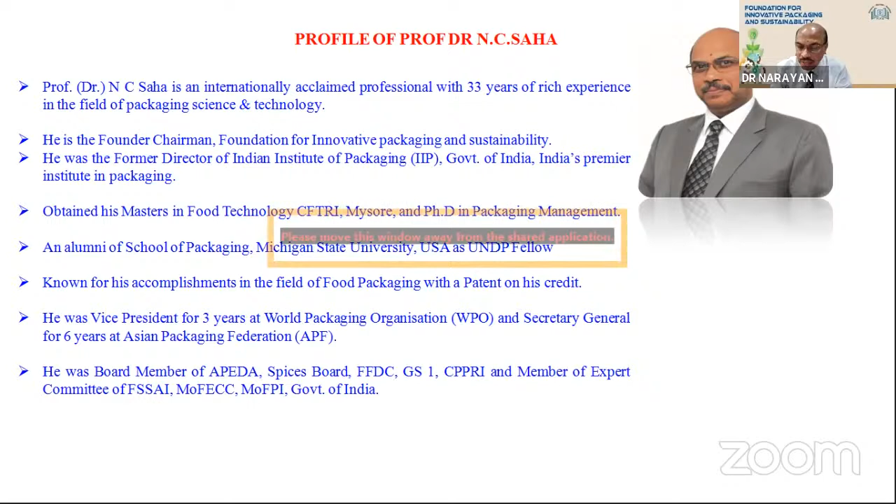The topic or theme of that conference was how best we can make recycling a profitable business. Having had a grand success with part one, we have taken an initiative to do part two, where we are thinking about MLP, the multi-layer packaging, which is a very hot subject of concern today, with everyone focused on multi-layer packaging, how best it can be recycled and how best it can be managed.

Today, all of us know that plastic is a wonderful material, and there is no alternative to plastics material. In fact, if you look at the consumption of packaging material, more than 50% of packaging material is plastics, followed by about 35% paper, and then glass, metal, and so on.

Among all the plastics, the major growth is the rigid plastic material, including PET bottles for packaged drinking water and beverages, plastic caps and closures, with an annual growth of around 25 to 30%, whereas flexible plastic has got only an annual growth of 11 to 13%.

But very interestingly, the flexible plastics material, which makes the multi-layer material widely used by FMCG companies, including fresh milk, is mostly visible because of its 5 to 7 color or excellent printing. And this has become a great concern to society in India as well as overseas. But this is mainly due to a lack of proper collection mechanisms implemented in the country, which leads to the problem of littering and environmental problems.

Due to this fact, the government of India has also made a restriction on single-use plastic. But the question really lies here: who is the culprit and who should be victimized? Is plastic the cause of environmental pollution, or rather are we, the citizens, responsible for creating this problem? There's a great need to educate citizens to change their behavior so that post-consumer plastic waste material is collected properly, recycled, and converted into value-added products and not allowed to be littered.

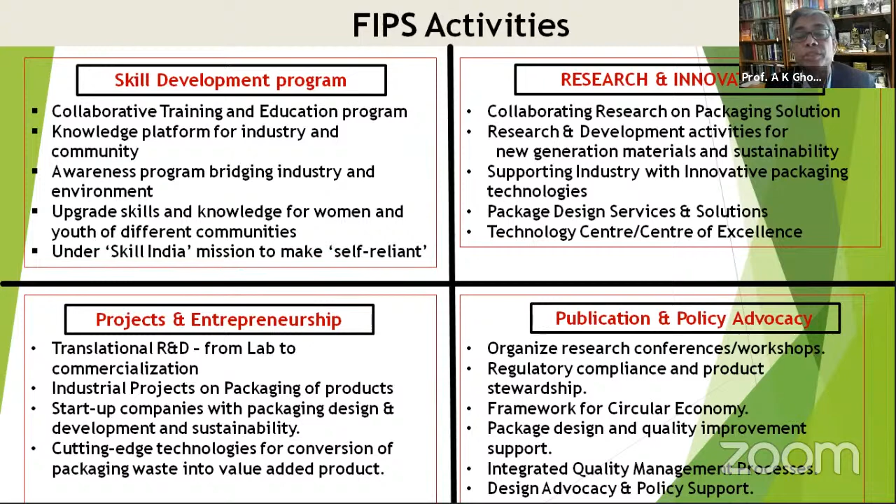Next slide, please. And we put together a KITE module for the foundation, K for the knowledge platform, I for information technology, and T and E for the training and education program. As you can see, based on this information package and knowledge platform, we have already considered many programs like basic training program, elementary training program, advanced training program, entrepreneurship training program, and we have taken up quite a few of them already. We have collaboration with a number of institutions.

We have collaboration with the Northeast Center for Technology Application and Reach. We have collaboration with Mahatma Gandhi University, as Professor Sabu Thomas, Vice Chancellor, is already present here and has already mentioned, and we are very honored by that. We have a program with NERIST in Arunachal Pradesh. We also have an MOU with the National Institute of Micro, Small and Medium Enterprise, MSME. We have an MOU with the Foundation of Innovation and Technology Transfer at IIT Delhi in a similar area of work. And we also have an MOU with the University of Science and Technology, Meghalaya.

And recently we have an MOU with university colleges within Delhi, which is Bhaskaracharya College of Applied Sciences in Delhi University. And we have also extended MOUs to 2 other associations, including the PhD Chamber of Commerce in Delhi. Next slide, please. As you can see, some of our activities undertaken from February this year on food packaging, and also packaging innovation and environment, carried out with the PhD Chamber of Commerce. Next slide.

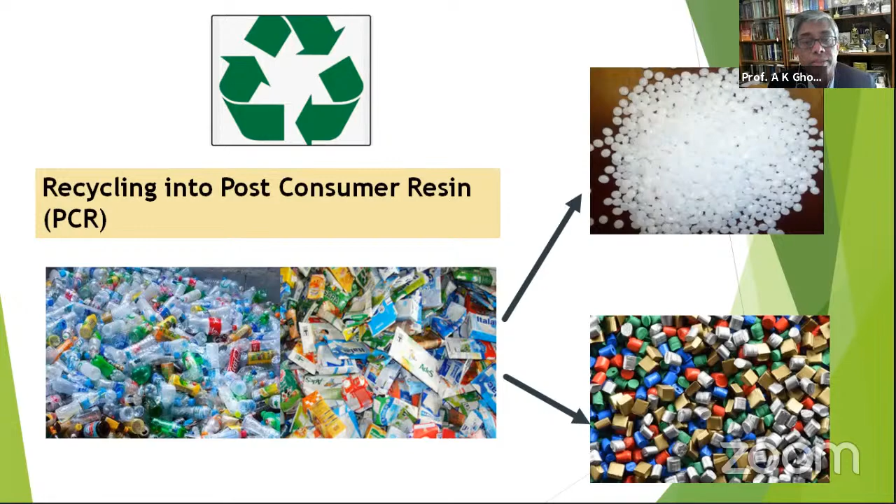Next slide, please. And as a part of our activities in the foundation, we are involved in studying the product life cycle, which involves selection of materials, optimization of the production technique, and an efficient distribution system, which involves reduction in environmental impact that can be calculated from the life cycle analysis procedure: low energy consumption, clean energy source, consumables reductions during use, and optimization of the initial life cycle and of the end-of-life system, and we take care of all these, including the recycling of materials.

And the foundation looks into deriving circular economy thinking in this way. We have taken a couple of programs where we look into material efficiency and carbon footprint mitigation together, how they can help each other. We can see how we can take materials like multi-layer packaging, make post-consumer recyclate from there, and use it as a replacement of virgin material, whether from single family or multi-family material, assessed by life cycle assessment with the world standard of ISO 14040 or 14044. This is available with the foundation as a very valuable activity.

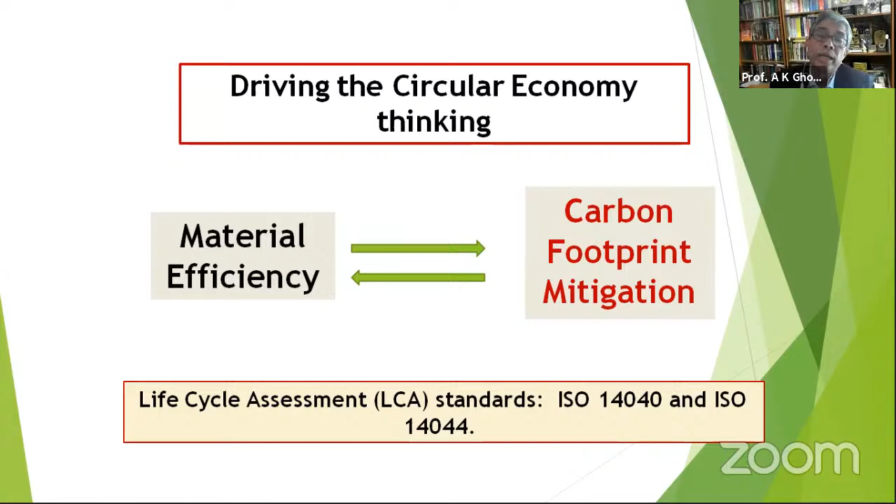Next slide. And to summarize, the FIPS activities on sustainability provide lots of opportunity for circular economy solutions to expand the scope of recycling methods across the plastic value chain. Plastic waste leakage into the environment is less desirable, and we can see what are the preferable methods to take care of that.

These are taken up and can be carried out as a part of the activities of the foundation, which involve establishing a recyclability hierarchy. We can compare upcycling possibilities versus downcycling. We can see the effect on recyclability due to the presence of similar and non-similar materials. Material reduction, especially in terms of thickness, versus collection and recyclability from waste. In one or two projects we are looking into that, and we'd like to look further into this.

Material selection, where we can lower the number of layers versus bringing higher functionality through compatibilization or some material addition. And there can be design for sustainability, and the other area is alternative material synthesis, synthetic versus biodegradable or bio-based material. So these are the activities we'd like to emphasize and strengthen.

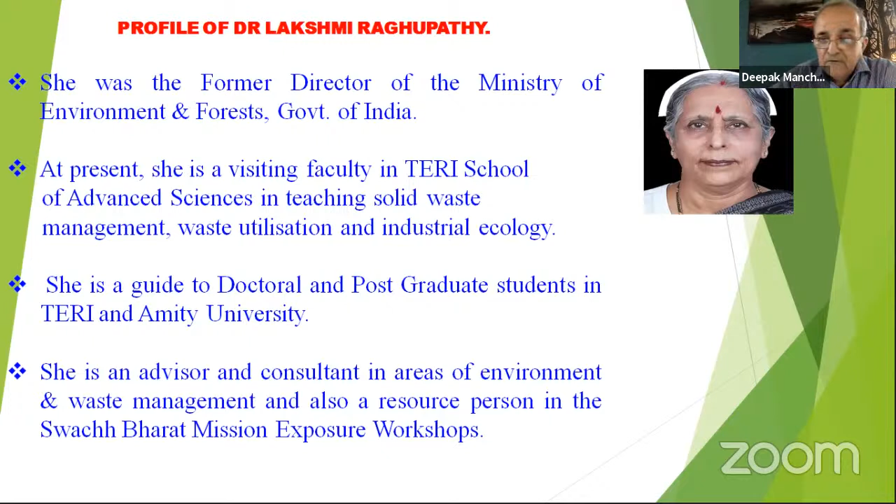You are muted. Please unmute yourself. Yeah. Priya, can you... Yeah, I've done it.

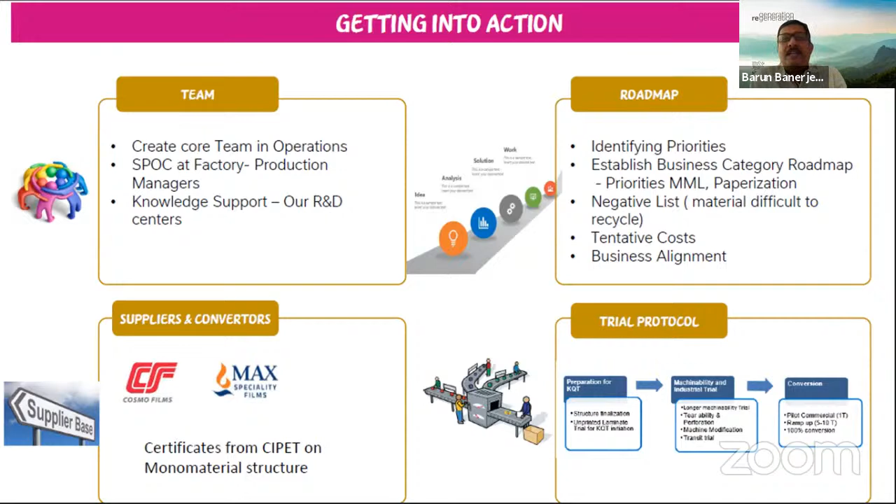So this is a way, and then we took the trial protocol with the key success criteria on how we should ramp up these trials. It should not be like we took smaller quantities; we looked at it in different machines, different configs. We have different types of machine, different speeds of machine, different performance of machines. And I'll go to the next slide where we have looked at the machine improvements we had added in our development also.

So here we also had to learn, unlearn, then relearn, sharing the learning with the learning log with other factories together. It is not an easy journey. It's a complex structure. So we need to see all the process parameters with our partners, upstream raw material, as well as with our converters together. We also need to look at all the success criteria which are mentioned, like seal integrity, which is the first thing, so that our pack doesn't open up.

Warehouse cross checks are very important, because when you produce in multiple numbers, you have to do a lot of checks to see that your packs are defect free. Because with monomaterial, you will also see that it has a lesser seal strength, to the level which is optimum, but when it is really going through the transport stress, is it able to withstand? So seal integrity is good, but is it able to handle all the transport tests? So this is the area where we thoroughly underwent the tests.

And second, another area where we saw the defect level in the sigma level: how are your packs in the sigma level, the defects between the current and the new structures. Similarly, although it is a monomaterial, BOPP, CPP, this material storage is very important. Storage time, conversion time, all this needs to be maintained. We also looked at all the machine stoppages, analyzed them, then we did the transport test to see it.

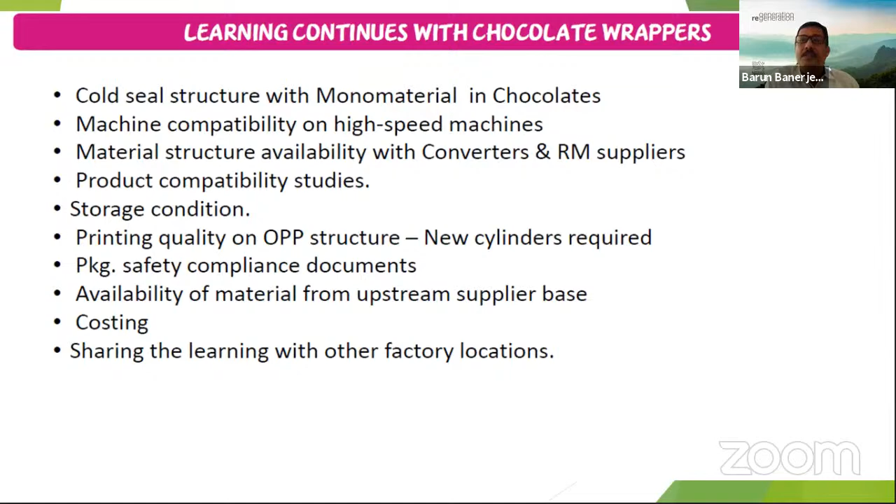Just a glimpse of them. We have also looked at the ones which litter, the BOPP tapes. Although the shipper is paper, the tape is loose and it is thrown. So how do you really handle that particular material - we used to use paper stick tapes, then we went out of the paper tape. So this is one example where we restarted looking at bringing back the paper tapes, which is a very simple one. That can work because the papers are being recycled, so with the tape in it, it always becomes difficult and becomes litter. So as a waste management solution, I think this is a very good one to work on.

Next, please. I will not go into detail, but this is a simple EPR, which is the compliance where we are plastic neutral from 2020 onwards. And I'm proud to say that we have managed plastic very well, which we produce as a post-consumer. We are doing complete recovery as per the plastic waste management rule regulation. We did engage multiple stakeholders to really see different areas where we can recycle. And we are also working now on pyrolysis, which could be another area where if it works, it would be the right approach to the circular plastic economy, to go back to virgin plastics. Now with the new regulation coming, I think with the use of recycled plastic, it's very good news for all of us.

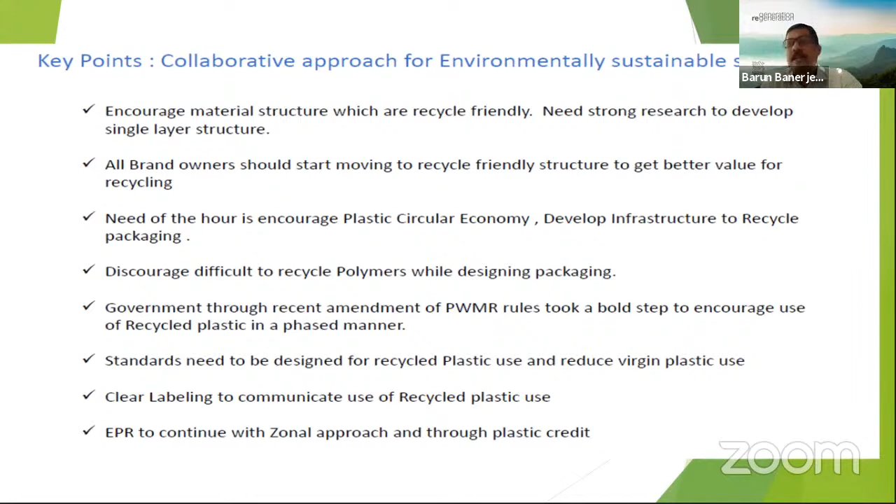Although we did our circular economy, we are doing our plastic neutral positive 100%. We are doing work on the hill station also, but this is the approach. Zonal approach would help definitely. With that, I thank Professor Saha, thanks everyone that you have given me the opportunity to share the MLP challenges to convert from MLP. Thank you so much.

Thank you, Barun. I think it was an excellent presentation, and I should say it's a true technical and scientific presentation. Everyone, the audience would know that packaging is not just wrapping the product. It's a combination of science, art, technology, and of course, economics. Barun was trying to emphasize what is the journey that Nestle is doing from the MLP to mono-material. Very frankly speaking, the multi-layer packaging, it is really by compulsion. None of the brand owners are interested to use more and more packaging material. Rather, they are considering sustainable approach, the resource efficiency.

But the problem is it has come by compulsion based on the food product. Some products are very oxygen sensitive, moisture sensitive. You need to have barrier properties. Single layer may not have an oxygen barrier, moisture barrier, sealability, printing, transparency. If you really want to satisfy the consumer, you need to have all these aspects. So what Barun was trying to say, his journey from Nestle, that from multi-layer to single layer, they are going, they have a lot of challenges they are facing, starting from the seal integrity.

At the same time, they have to also say that transportation hazards, how really it would function. But very interestingly, he said a very simple solution, they start with a tape, which is a closing tape. We say that as an ancillary material, I think Nestle has already switched over from the plastic tape to the paper tape, which was there about 30 years back. He has come back, and that's the small way they're trying to have a sustainable approach.

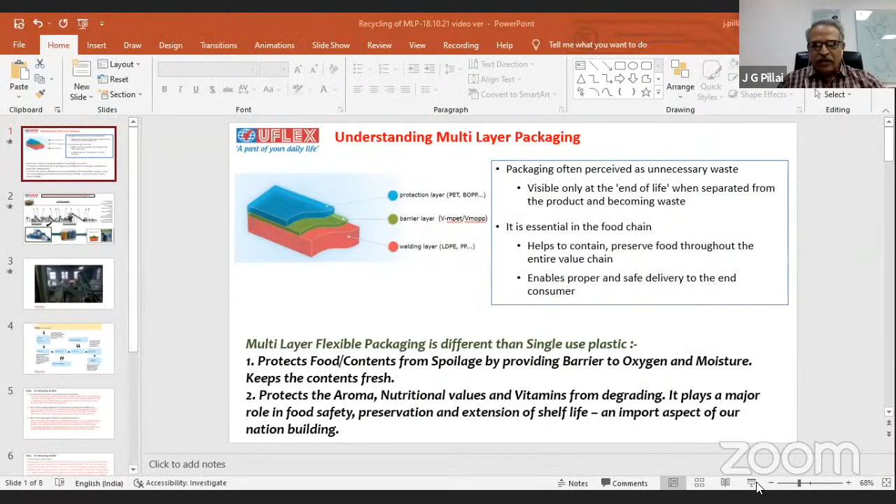Okay, has the presentation come up? Yeah, it has come out.

Most of you all know what multi-layer packaging is, and as Dr. Saha had explained, at this stage it is not very possible to completely change over to mono polymer materials because there are multiple layers in an MLP, multi-layer packaging, which provides functionality. And in a true sense, if you have to be sustainable in packaging, we have to address multi-layer packaging.

Because whatever we have done in the last 3 years or so, after Prime Minister Modi had made a speech from the Red Fort, we have addressed only single-use plastics. Single-use plastic, although it is an eyesore and you find it everywhere, in terms of the percentage of littering it is far, far less. The consumption of single-use plastic would be around 15 to 20% of total packaging consumption.

So we have been talking to the MOEF saying, let us address MLP. If you're really interested to address the plastic packaging waste issue, then you have to address MLP, and addressing MLP is obviously not easy. If it was easy, probably other countries would have adopted it significantly faster than what we are trying to attempt. But at least in this EPR, an attempt has been made.

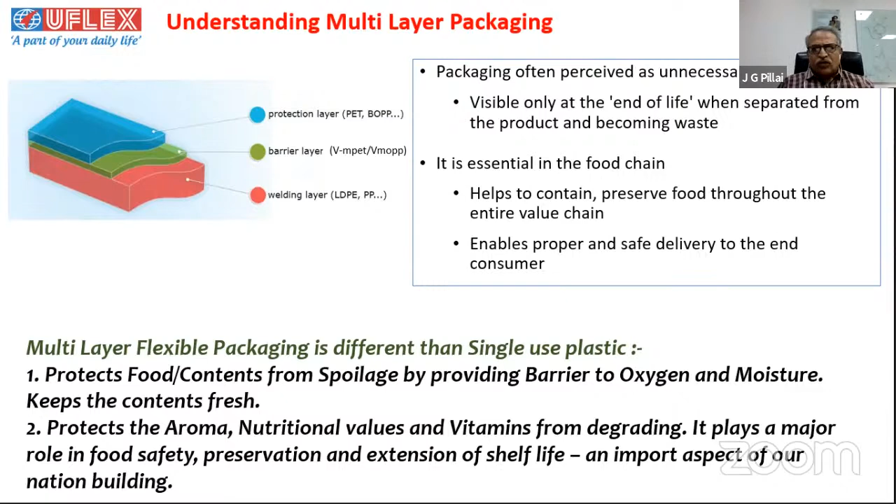So this is actually the point: although EPR talks about recycling in this edition of EPR, collection will be a major problem for every brand owner. Unless we have a collection system, MLP recycling would be a tough task, because it will not be available. Having said that, I'm here to discuss how we can recycle multi-layer packaging. I thought I'd just make this passing remark if we have to address sustainability in our country. Let us talk about multi-layer packaging recycling.

Indian multi-layer packaging is very different from the ones available elsewhere. The PCR MLP we have in India is very, very different because we use a lot of oil. And also, since source segregation is missing, we mix the multi-layer packaging waste along with the food. Now, as a result, the food has to be separated from MLP. So this is why what you are seeing on the screen is a very complicated washing system.

Normally an MLP line, I've seen one in Poland, is not so complicated. Here you will see at least 5 different types of washing. There is a friction wash, a rotary wash, a reverse screw wash, a hot wash, and a caustic wash. So this is designed for the Indian food, the Indian MLP, I would say. MLP is MLP everywhere, but when it comes to PCR, the Indian PCR MLP is widely different from the ones available. It is slightly closer to China.

China also uses a lot of soya oil, but they have a good source segregation system, so the plastic packaging is available in a manner where organics or food is not involved. In this case, we had to develop a shredding machine where we had to remove the food first. If I buy 5 tons of PCR, I get at least 2 to 3% of food in that, in terms of oil, salt, spices, leftover chips, leftover food. So you need to wash them thoroughly. This is a washing line which we developed in-house to wash the PCR.

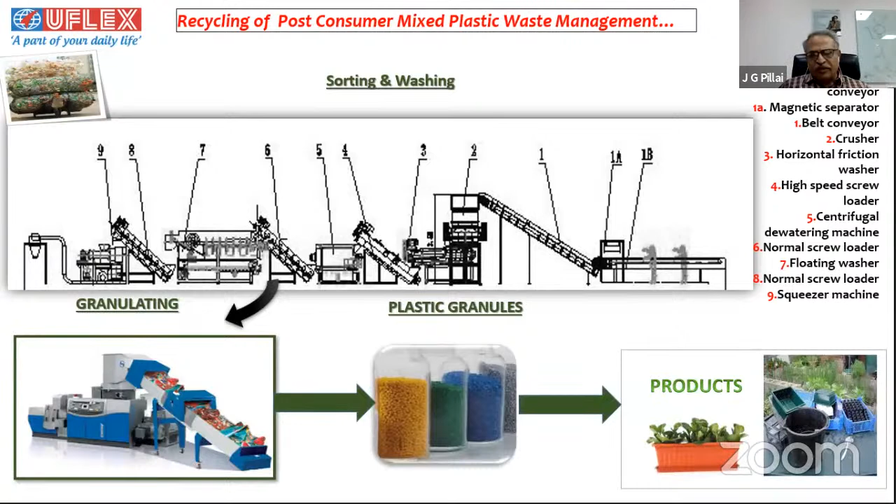This was a very important innovation, because the squeezed-out material has less than 2% moisture. This enabled recycling of multi-layer packaging without much issues, because moisture is a big deterrent for any recycling technology. Once it is done, it was very easy. We could recycle and make thousands of components from the MLP. We will see a small video. This is a live video from the Noida operations.

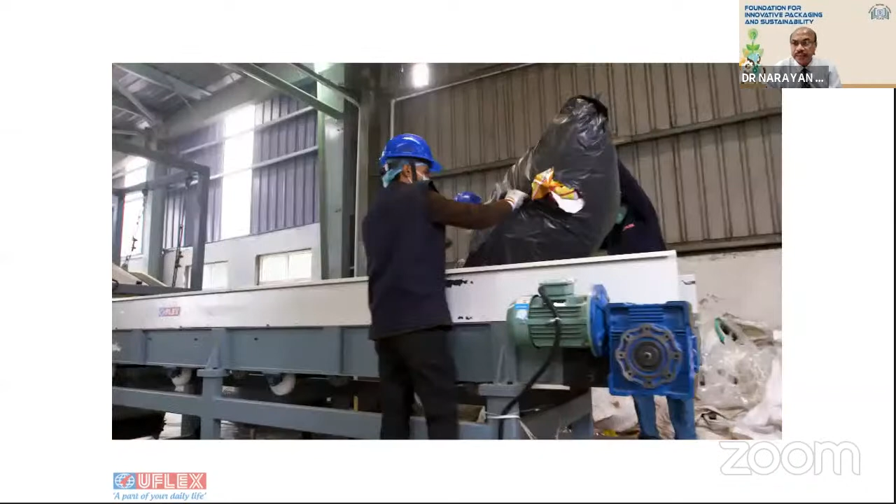I hope you can see the video. Hope everyone can see the video. Yeah, it's working. Is there any sound, Pillai? There is just music, which can be ignored. Okay.

So look at the waste, the quality of waste. The rag pickers pick it up from the nalas and the roadsides. From this condition, you have to bring it to a recyclable condition. So you see, first it has to be shredded.

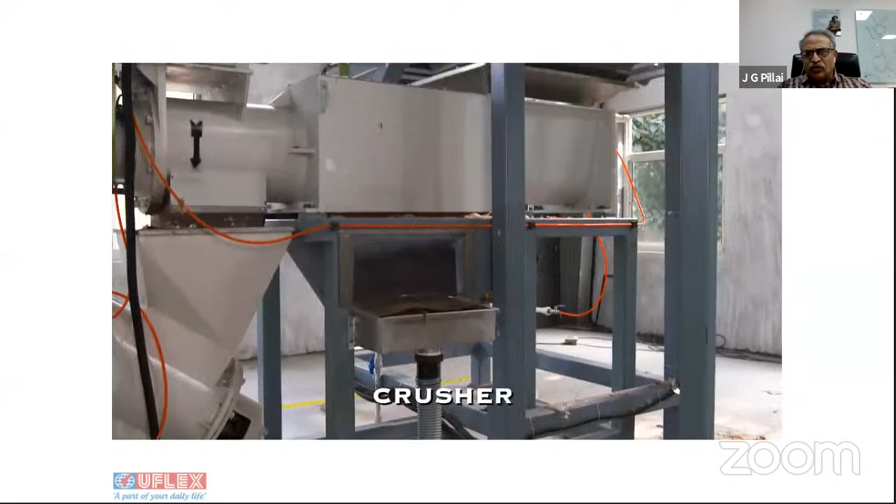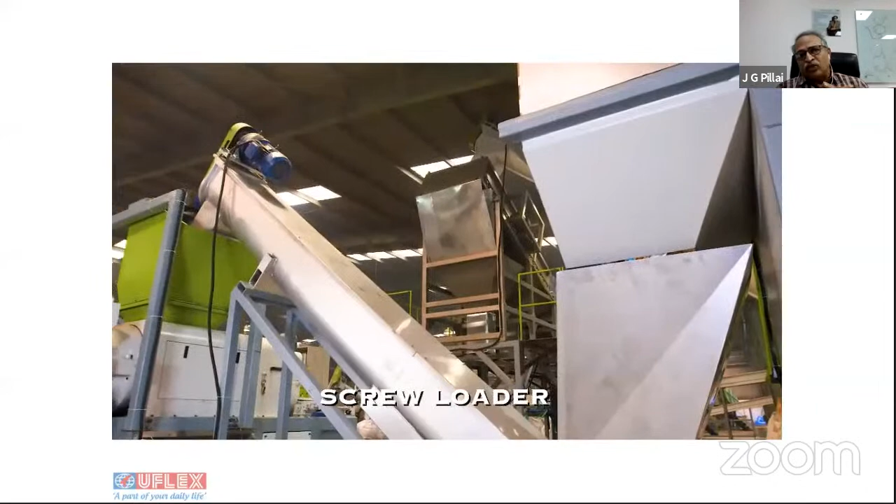So it goes through a multiple washing cycle. So this is the cleanest material which we can get after the washing. There is a last wash which is called a caustic wash, where it removes all the oil. And finally, it is loaded in a reverse manner. So the water flows in one direction, the material moves in the other direction.

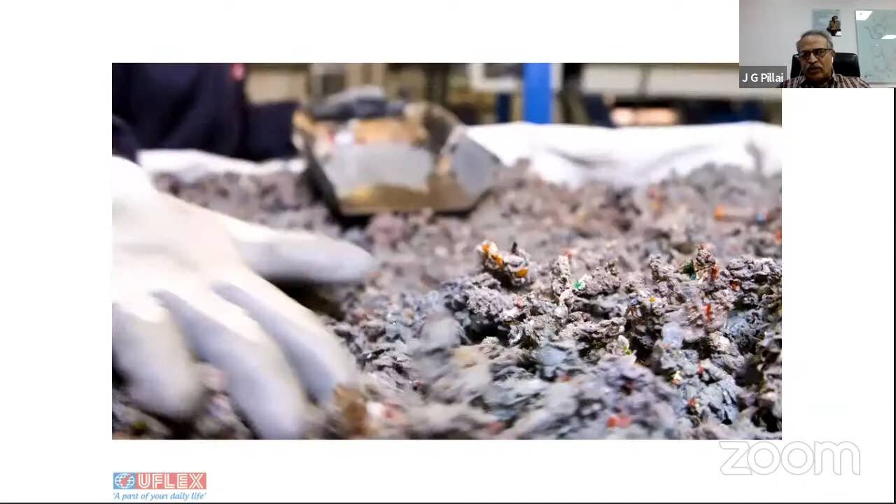So this is the squeezy which I was talking about. This is the squeezy material. So this is the catch. So the material is now a conglomerate, a composite of different types of material, inks, adhesives, metallization. Everything is squeezed out and mixed properly. So instead of feeding the MLP directly to the extrusion, this is being done.

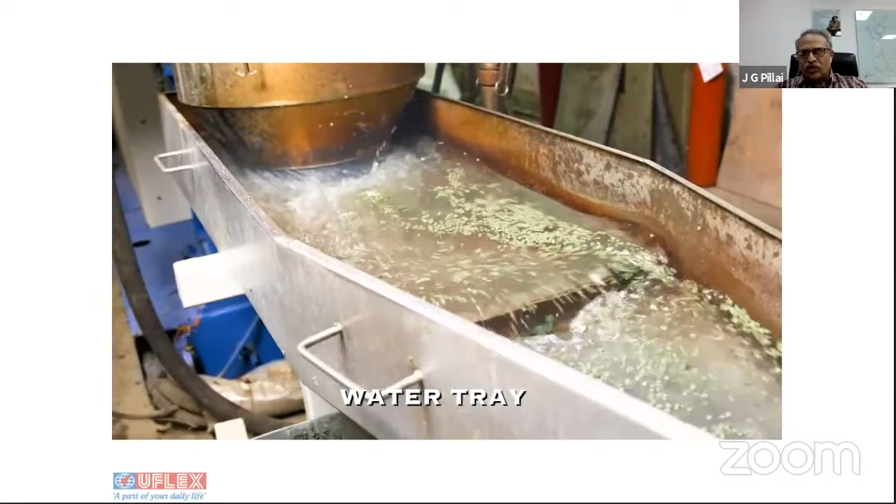And the extruder is divided into 2 halves. So first is a mother extruder, where we use a very large screen size. So it's a mother-daughter extrusion, where we have 2 different types of extrusion L/D ratios, so that you get a very fine mix of material. And you see the quality of granules. When you saw the quality of the input and now you see the quality of the granules, very, very different.

Now you can see thousands of components which we have made, mixing up to 50% of the material. This is the chair which is made from 50% virgin material and 50% recycled. So this is the technology which I was talking about. This is in the public domain, there is no proprietary information, and we are very open to providing this technology to anyone who wants it.

So there are compatibilizers available. Earlier it used to be only from DuPont, but now there are many companies. There's a company in China called Lushan. They also make very good compatibilizers. You send it to the mother extruder. The mother extruder has a larger screen size, so you remove the volatiles which are caused by the inks and adhesives. So all the volatiles are removed.

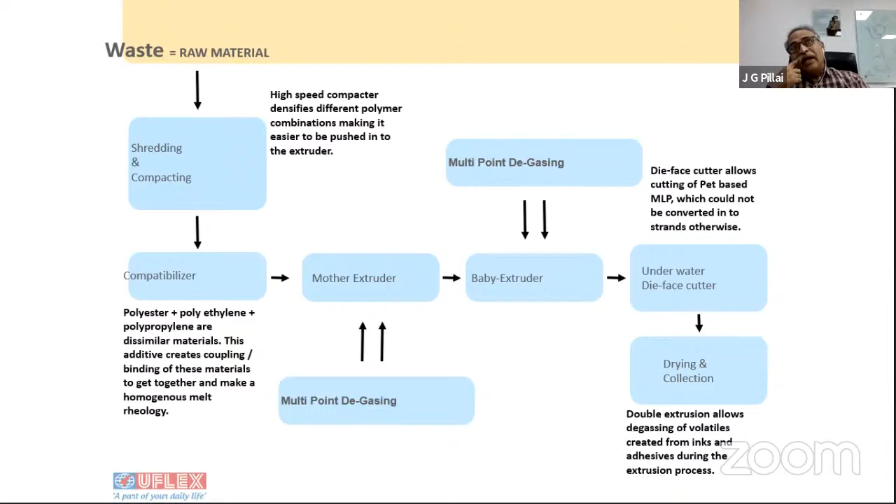So this is the technology which can be provided to anybody who wants it, because I was making a calculation. If the latest EPR has to be implemented, and if MLP has to be recycled, India would need over 500 recycling systems in 2022-23 alone. And right now we have less than 50. So you can imagine, we need to take these EPR guidelines very seriously and start investing.

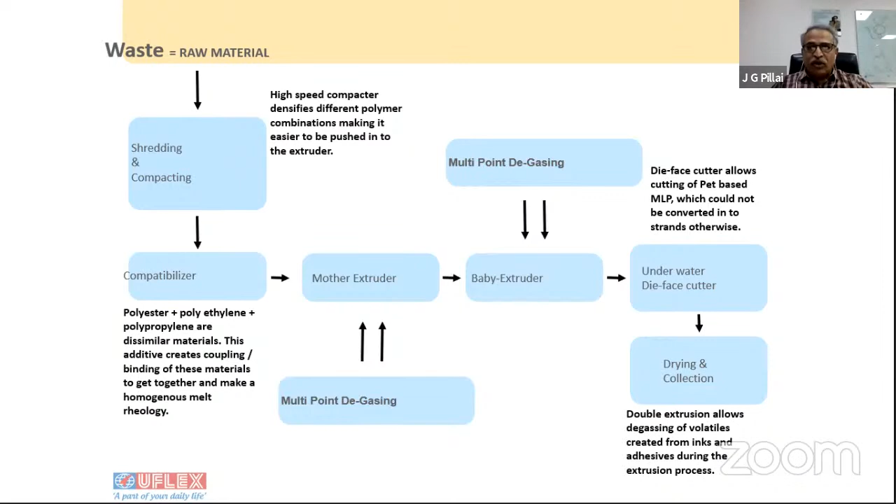We need more and more recyclers coming forward, more and more brand owners coming forward to promote MLP recycling, so that when EPR is in place, you don't have to cross-subsidize the EPR collection and recycling. So this is very important. We must start focusing right from today.

A little bit of FAQ. Is it really essential to have only a monofamily material? No, not at all. You can have multiple materials. The only difference is, if it is a mono material, you can upcycle it. We have made PE films with up to 20% PCR. We can go up to 30% PCR, but 20% PCR has very little drop in the mechanical properties.

Recently, we trialed some diaper bags, and of course a lot of carry bags can be easily made. Stretch film, somebody talked about stretch film. Stretch film with 20% PCR is easily made. So things like that. So monofamily material will only enable upcycling.

Other than that, if it is a multi-layer packaging with multiple polymers, then you'll have to go with the molding applications, downcycling. What are the envisaged applications? You can have a lot of applications in molding. In UFlex, we have 14 film lines, and all the film lines use cores, you know, the core plugs. All these core plugs are made from recycled material. So we have a consumption of around 3,500 tons of core plugs alone. So out of the 20,000 metric tons of recycling we do, 3,500 metric tons is consumed in-house.

So this way, a lot of materials can be consumed by the brand owners. Say, for example, Procter & Gamble, they make a lot of tubs and the scoops for the detergent. Everything can be made with recycled material. So the brand owners can themselves find a lot of applications where their own MLP usage can be extrapolated and used up. So this is very important.

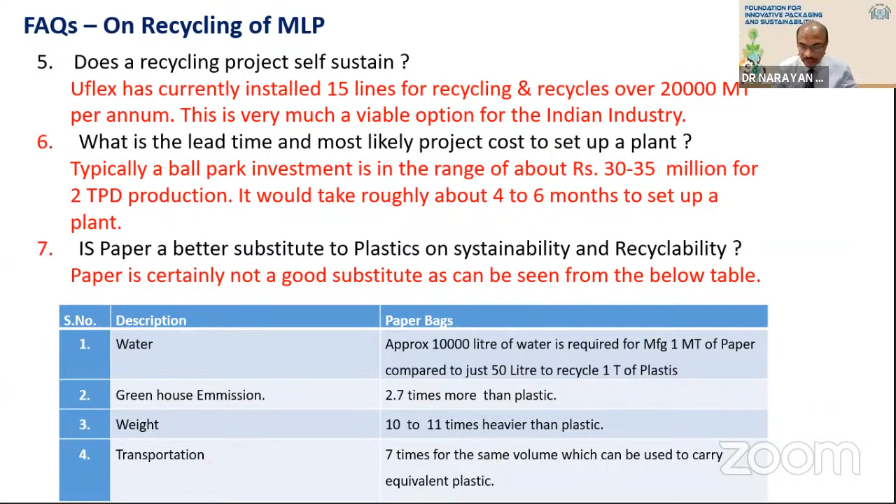We have with us Mr. Sachin Ganga. He is the sales and marketing head of EVAL Kuraray Corporation from Japan. Mr. Sachin is a graduate of the University of Pune in Polymer Engineering, and then he did a master's from the University of Mumbai. He worked with Reliance and NOCIL, and finally he landed at Kuraray. Over the last 23 years, he's been with Kuraray. He's promoting another polymer called EVOH, which, as we all know, is a very good polymer for barrier properties, mainly the oxygen barrier. And he's going to say that when you do the recycling of MLP with the EVAL combination, how the recycling becomes very easy and what the innovative solutions are. So with this background, I would now request Sachin Ganga to take the presentation for 20 minutes on the subject, innovative solution to recycle MLP with EVAL.

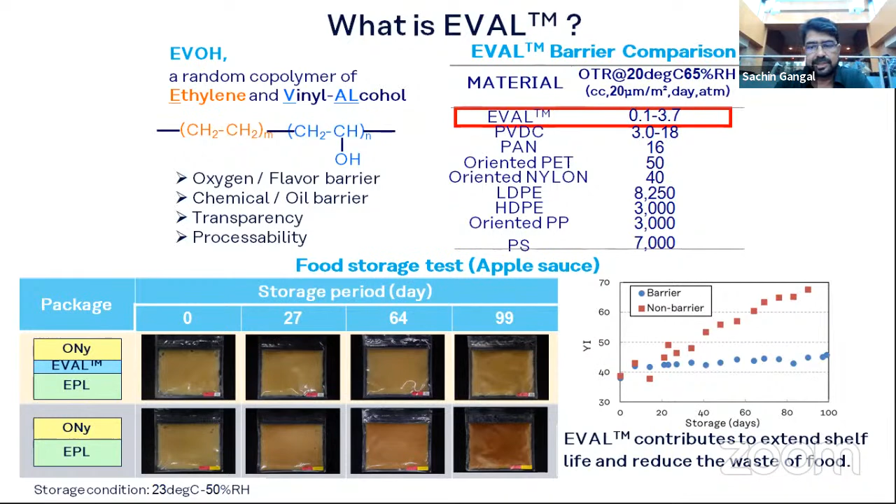So in a nutshell, what does EVAL do? EVAL has got so many properties. The biggest property of EVAL is the oxygen barrier. It can be processed on conventional machines. It has got oil and fat resistance, chemical resistance, which comes into play when we are using EVAL for making agrochemical bottles. One big application in India, which has caught up in the last 4 years, is EVAL plastic tanks, which are now used in place of metal tanks in most automobiles.

When you compare with metallized structures, it has got excellent flex crack resistance because we are talking of an all-plastic structure based on EVAL. Next slide, please.

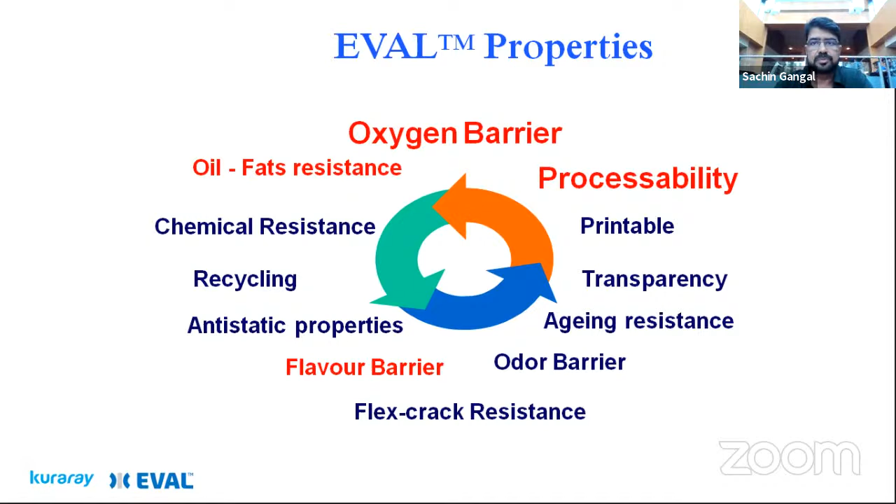So quickly, we are producing EVOH. As I said, we started in 1972 with our first plant in Okayama. We produced about 10,000 tons in Okayama. After that, we moved to Houston, Texas, and the last plant came up in Antwerp in 1999.

So in total, we have more than about 100,000 tons capacity of EVOH, and very soon, maybe COVID delayed our plans, but in the next 4 to 5 years, we are likely to have our 4th plant somewhere in Singapore. And I'm based out of Pune, where I'm responsible, as Dr. Shah introduced me, for sales and technical service for EVOH. Next slide, please.

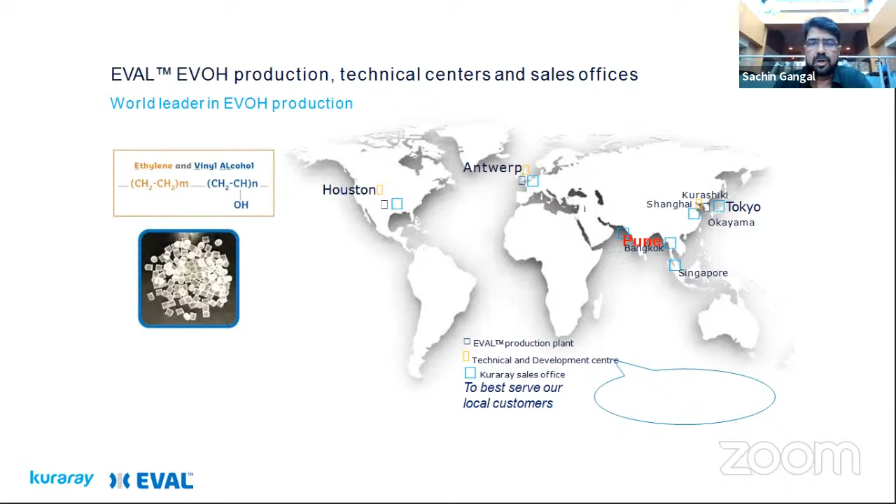As I said earlier, it can be processed on almost all conventional processing machines: blown film, cast film, thermoforming, BOPP, double bubble, triple bubble. Now everyone is talking of the new technology, machine direction orientation. EVAL extrusion coating is another application.

So when I talk to my converters or my customers, I say forget you're processing EVAL, assume you're processing your polyethylenes or polypropylenes. You don't require any special screw. You don't require any special equipment. EVAL can be easily processed on your conventional polyolefin processing machines on most processes. Next slide, please.

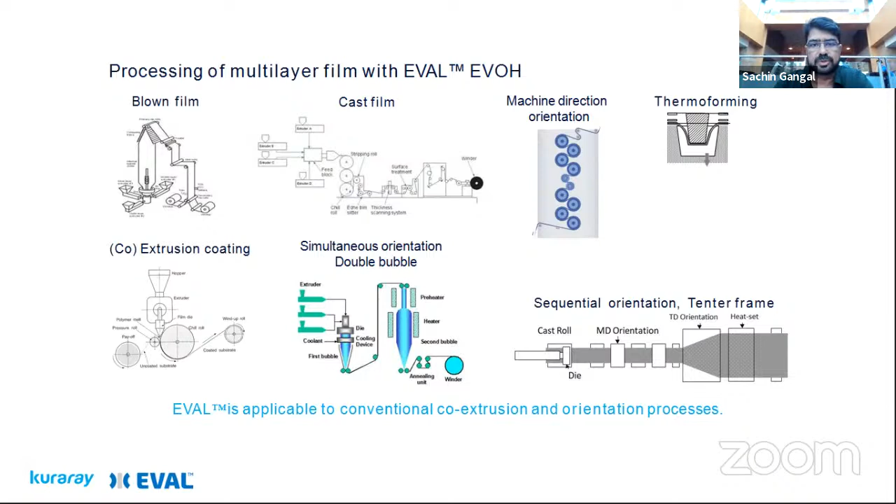So again, as you know, in a typical multi-layer structure, the barrier layer is just 5 to 10% of the total structure. So it provides the barrier, and it also contributes in its way to the environmental impact of food packaging. Next slide, please.

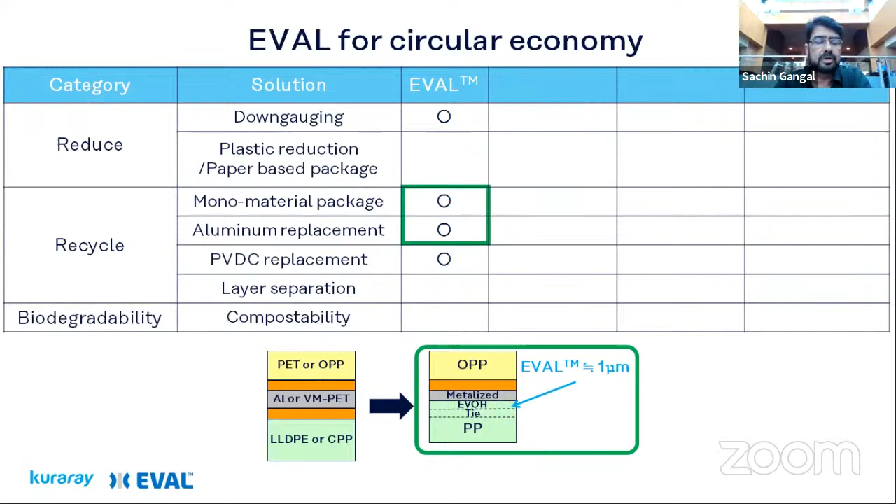Briefly, whatever advantages you get from EVOH for a circular economy - can it be downgauged? Yes, it has been used in mono-material. Is it an aluminum replacement? Yes. I think someone mentioned pharmaceutical packaging - EVOH is already being used as a replacement for PVDC.

Mr. Pillai would definitely agree with me, and I'm sure he has recycled multi-layer polyolefin films with EVOH. So it is well positioned in current polyolefin recycling, and it meets all the guidelines prescribed in Europe. The presence of EVOH does not interrupt the sorting processes as detected in polyethylene films. Mr. Pillai would be better equipped to tell us whether it actually happens, but as far as we understand, EVOH is easily recycled in most recycling streams.

We have several EVOH grades based on ethylene content. We have lower ethylene content grades, which can be used to meet new stringent regulations where the barrier layer thickness has to be less than 5% of the total layer thickness. We have medium ethylene content grades, where you require high barrier, probably at high relative humidity - generally used in combination with nylon, mainly for meat packaging. Then we have high ethylene content grades, used in BOPP structures to give a robust structure, which can be easily metallized and coated.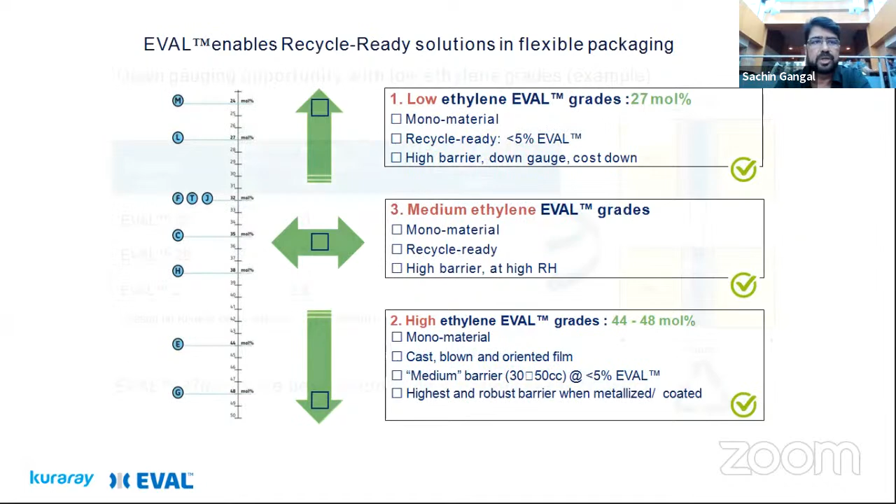To repeat what I said earlier - can EVOH be downgauged? Yes, of course. You can see for yourself that from a classical 32% ethylene structure, which we generally use for blown film applications, you can go down to one-third of the thickness, from 6 microns to about 2 microns, and the barrier is not sacrificed. So EVOH can be easily downgauged in multi-layer structures. The new generation machines, the W&H's and the Reifenhausers, are well equipped to handle a multi-layer structure of, let's say, 100 microns with only 3 or 4 microns of EVOH.

Some applications we are working on: edible oil packaging where nylon can be replaced. The mechanical properties of nylon could be taken care of by the new generation polyolefins, the metallocene polyolefins, and EVOH can contribute to the barrier. Currently, the structure used for edible oil packaging is, I believe, a 110 micron film with about 18 to 20 microns of nylon. Now that job can be easily done by 1 micron of EVOH. On some machines it's a challenge to produce 1 micron of EVOH in a 100 micron structure, but when talking about recycling and sustainability, maybe in future you will have edible oil pouches based on EVOH which have replaced nylon.

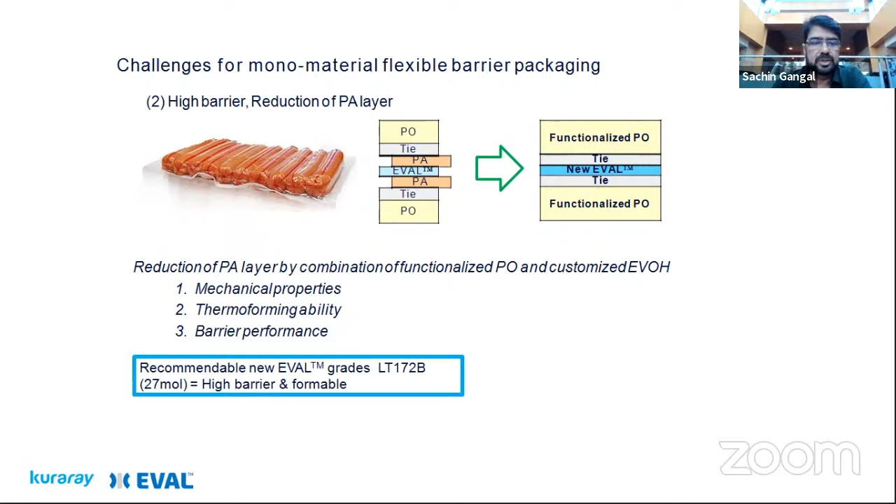Maybe a structure not relevant to India, since we're talking about meat packaging, but as an example - a nylon or polyamide-free structure where we have a new generation of EVAL, the lowest ethylene content, 27% ethylene content, to get the mechanical properties. Again, the mechanical properties would be met by the functional polyolefins, the metallocene polyolefins, for thermoformability, along with barrier performance.

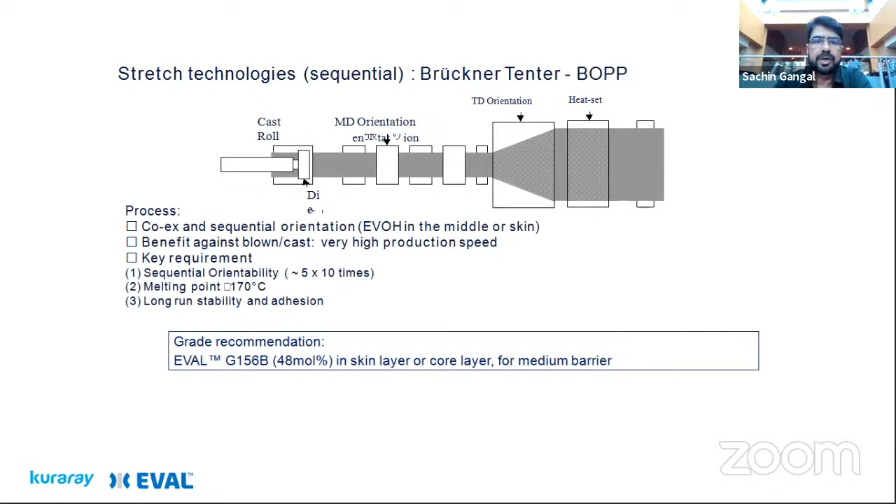I would quickly highlight one application which is growing by leaps and bounds in India, where we have used EVOH in BOPP applications. These last couple of slides talk about EVOH and BOPP application. I won't elaborate on how BOPP is produced - this is just a schematic representation of a BOPP process where our EVAL G156B grade, which is a 48% ethylene content grade, is being used for BOPP application.

Now, this is where we are talking of sustainability - using less amount of plastic. A classical structure, which is a 3-ply structure based on polyester, metallized polyester, and polyethylene, can be easily replaced by a 2-ply structure where you can laminate a BOPP or a PET. If talking about sustainability and recycling, a BOPP laminated to a barrier BOPP.

The biggest advantage of EVOH is that, being a polar material, it's good for metallization. This doesn't happen with CPP or BOPP, where the surface tension falls down after a couple of months. What we're talking about here is not only the shelf life of the packed product, but also the shelf life of the packaging material. Even after months, if the dyne value is in excess of 40, even after a year, for an EVOH metallized BOPP film, the surface tension or dyne value remains the same - a big advantage when converters or BOPP manufacturers from India are exporting their film and looking at higher transit times.

So this is one of the biggest advantages of EVOH. When you put EVOH on a surface and have to metallize it, my converters tell me they don't even have to corona treat it as they do for other polymers, because being a polar material, it easily accepts the metal on its surface.

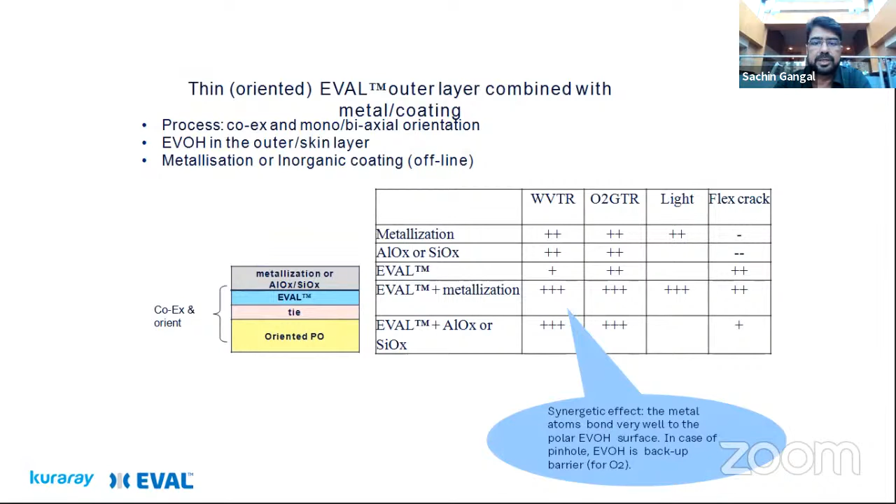Again, enumerating the advantages of an EVOH outer layer combined with metallization: you get good metallization, since EVOH easily accepts it. These are the big advantages of using a metallized EVOH film in a multi-layer structure.

So in a nutshell, I'd like to highlight that EVOH in combination with polyolefins does not disturb the recycling stream. It can be processed on most conventional processing equipment, and also now with new technologies like double bubble, triple bubble, and machine direction orientation. You can easily achieve ultra high barrier with EVOH using our new generation low ethylene content grades. It is definitely the best solution for food packaging, making it your partner for cost-effective, easy to recycle, and high barrier packaging solutions.

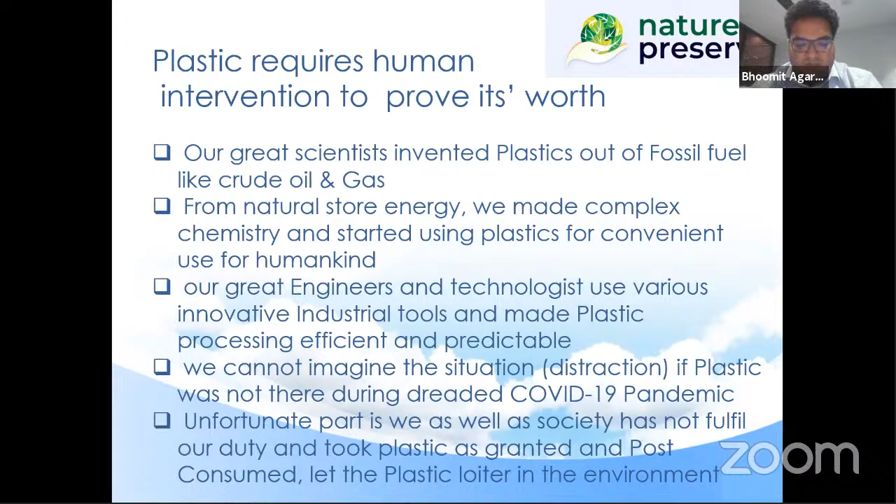Let's go to the next one. As we all know, plastic can survive multi-generations in the environment without degradation. So rather than seeing that as a problem, why not use it as a strength? Today we can recycle plastic into materials or products where we use the advantage of not being degraded, making products like boards or sheets that can be used in human settlement, construction material, or secondary packaging of products, bulk shipping peripherals, and so on.

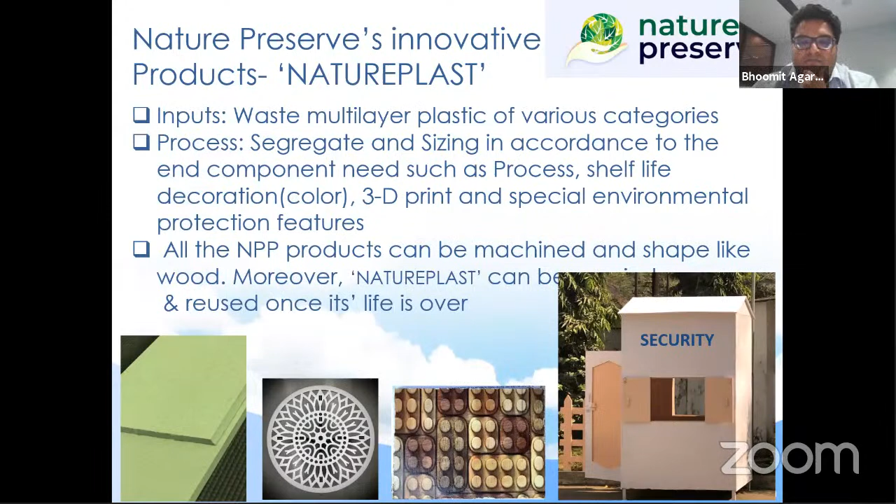So I think I have a very short presentation. If anything, we can take forward from here.

I think it's a great journey for you. Over a period of time, I believe NATUREPLAST will become very popular in the country. I think the plywood based on wood will slowly be replaced by your NATUREPLAST. Let's see in the future how your products will be more visible in the market. Thank you so much, Mr. Bhoomit, for making a good presentation on the subject.

Thank you. So we move on to the subject of the value-added product. As we started, MLP is not really a waste, it's a resource. On the same theme, we have with us Mr. Jignesh Shah, the managing director of Deluxe Recycling India Private Limited, a very popular company in the field of eco-friendly waste management. He started his journey in 1998, stepping into his family business of paper and board manufacturing and waste management solutions, dealing with packaging firms like Tetra Pak and Hindustan Packaging, and added a recycling portfolio.

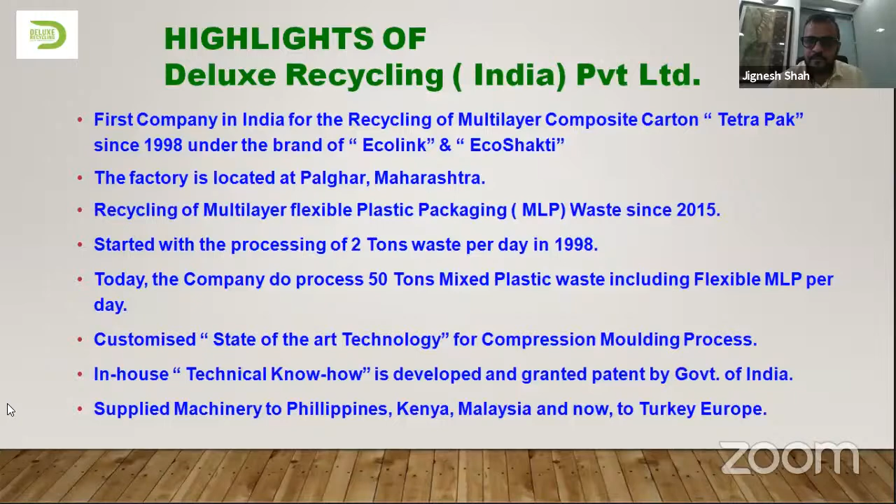So why recycle? Our natural resources are already depleting, and we have another concern about generation of waste above these depleting resources. So a step further from optimum utilization of resources is also recycling of the scrap generated from these resources, and ideally to replace these natural resources with recycled products.

So in our process, which is again developed in-house, we are able to use lots of different kinds of waste streams: mixed plastic waste, which can contain LDPE, HDPE, PP, or any kind of polyolefins; multi-layer films, which will have at least 60 to 70% PE or PP content. We can have a combination of paper, aluminium, or any combination thereof laminated to polyethylene. We can use post-consumer multi-layer films or cartons in a mixed format, and also post-consumer and pre-consumer laminated squeezable tubes.

So the process is fairly simple. It's basically size reduction, which is shredding and grinding, and then we are mixing and drying the ground portion, and then it goes for hot pressing, cold pressing, and then the final sizing. It's again a customized compression molding process.

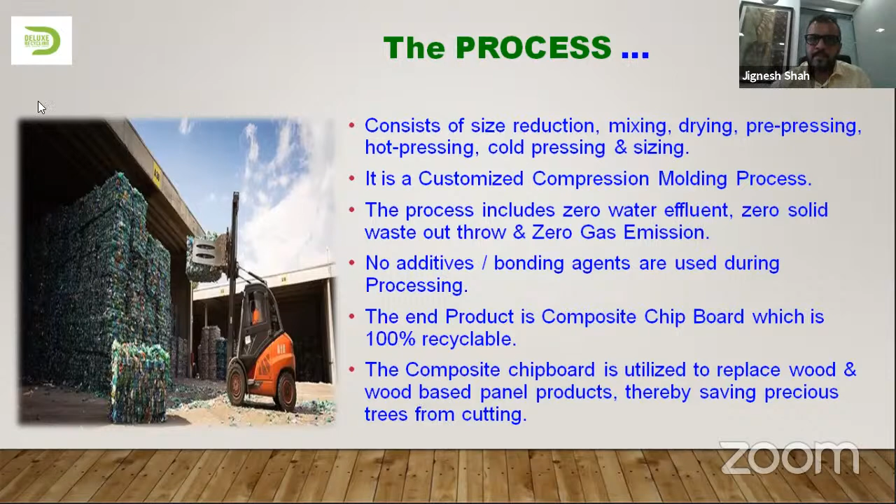This is just to display our process in a nutshell. There's a raw material that comes in, it is dispersed, it's milled, which is ground into small particles. It's formed on a plate. The plate is then sent to a heating press, then a cooling press, and then it is cut and edge trimmed to create finished boards. There's a small animation video to explain exactly what products and services we do. I would just like to share this.

No sound, Jignesh. You have to start it again. Okay, just a moment, sir.

Do you ever wonder what happens to garbage? Even if you are a responsible citizen, what happens to rubbish after you have carefully disposed of it? We have been thinking about these things too. Sadly, we couldn't find any satisfactory answers. So, we have decided to do our bit for the environment. We start by cleaning our surroundings.

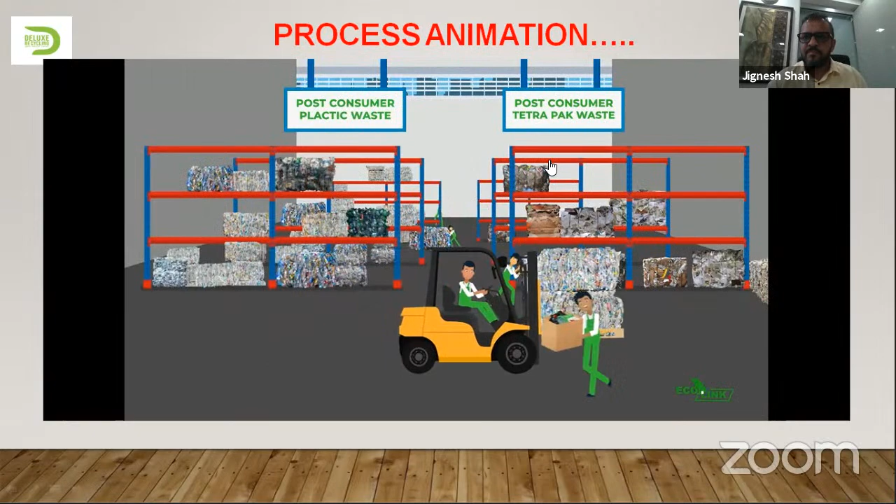The street collectors carefully hunt down garbage and then segregate recyclable material. The material goes to agents who further segregate it according to recyclability. Since we accept all kinds of soft mixed plastic, they send us carry bags, multi-layer plastics, packaging plastics, and others. After this careful sorting, these plastic products finally reach our factory. Our aim is to make useful products from this waste. We start by shredding mixed plastic into fine particles.

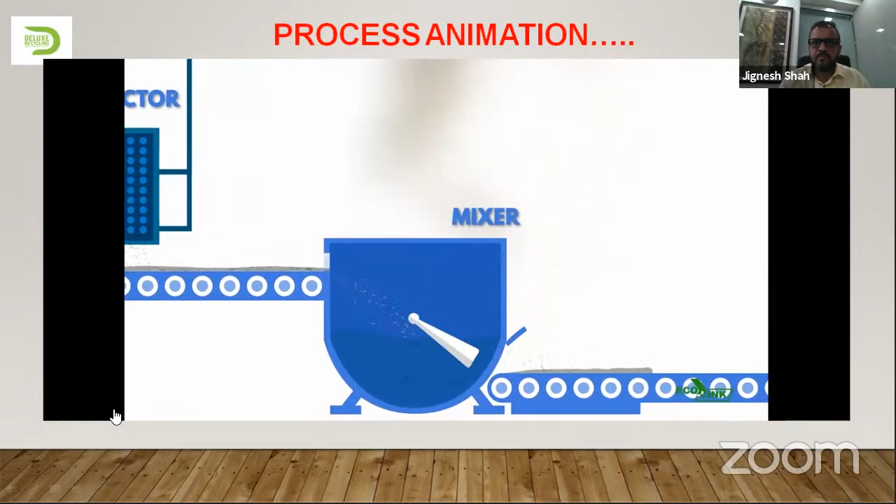This is then mixed thoroughly and ground. Using a conveyor belt, we transfer this material to the preparation table and it is spread evenly on flat sheets. After undergoing a few more steps like hot press, cold press and cutting, the material is ready to be used. This is when the actual magic happens.

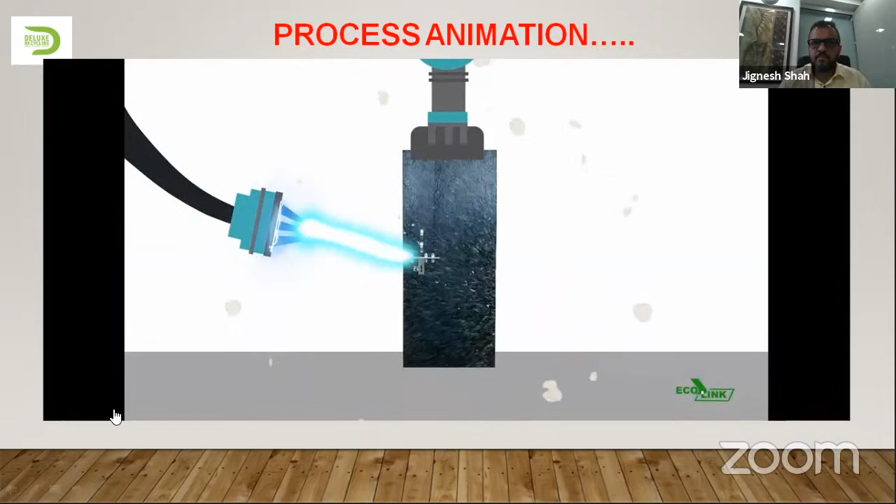The waste is transformed to an alternative material for wooden products like doors, garden benches, chairs, pallets, and thus we reduce pressure on our precious forest resources. However, we don't just create recycled products, we ensure that our processes also care about the environment. So, if you have been thinking about the environment, you are not alone. We are determined to give back more than we take. Come, join hands with EcoLink India and do that one bit extra for Mother Nature.

I hope the video was visible and audible properly. Yeah, it was there. Yeah. Go ahead.

Okay, so to talk further about the products, the boards are manufactured from multi-layered flexible packaging wastes, mainly consisting of 2 or 3 layer material, including polyethylene. Sheets are available from 6 mm to 18 mm, and the standard size of the sheets is about 8 feet by 4 feet. These boards can be laminated with any colored Sunmica, and it's amenable to fittings of screws and hinges just like any other wood or wood-based panel.

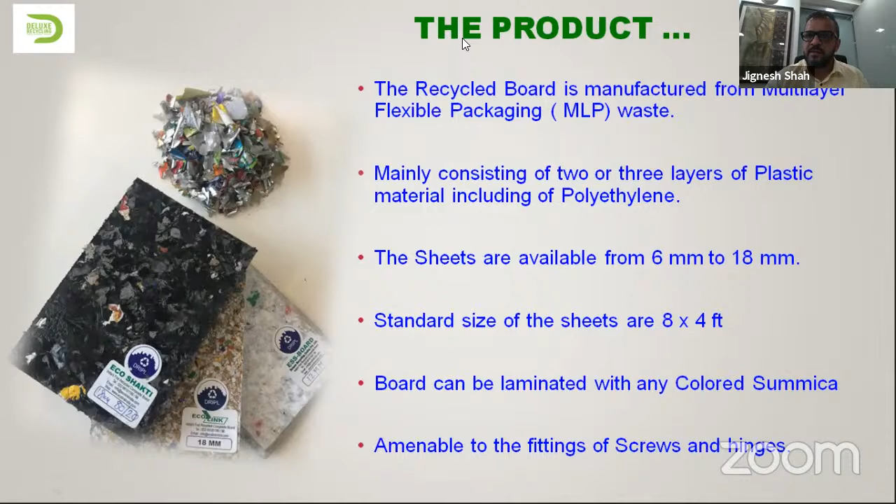It has some very interesting characteristics. It will not rot, crack, or splinter like wood. It's a lot denser than wood. It's very highly durable, stain resistant, graffiti proof. It is also very highly water resistant. It has a good aesthetic value. It's impervious to insects, and it's not affected by exposure to most mild chemical substances. More than anything, it's flame resistant and it is cost effective.

So the boards have a very high compression strength, and they don't expand under varying climatic conditions. There are no knots, whereas wooden planks have a lot of knots. It has very good insulation qualities. It can be sawn, molded, and screwed like any other wood or wood-based panel, and it's itself recyclable in the same process.

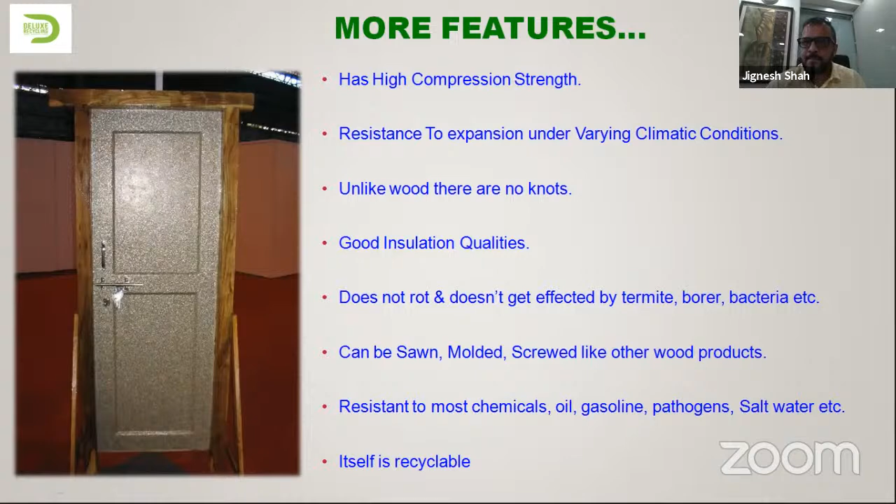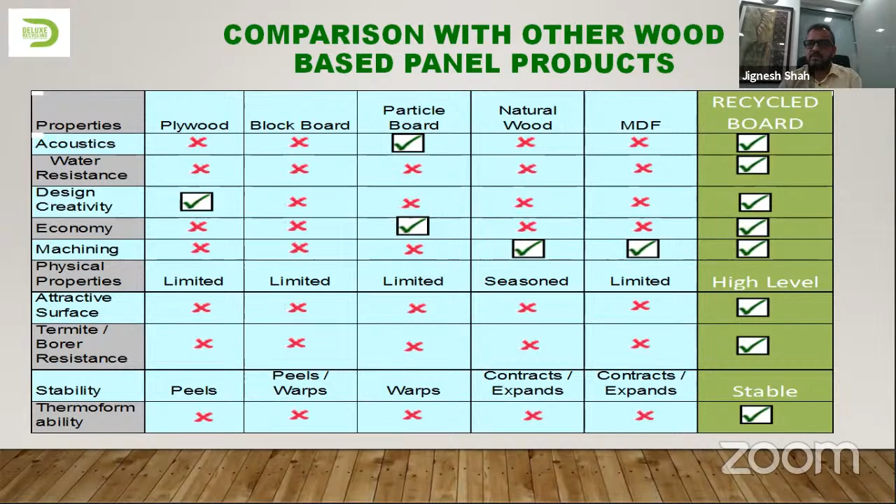So when you compare it with other wood and wood-based panels, our boards have clear advantages, such as better acoustics than other boards. Water resistance is very high. Better design creativity is possible with these boards. It's very economical. It can be machined just like any other MDF or natural wood. It has an attractive surface, so it does not need any additional lamination or decorative surface on top. It's termite and borer resistant. Sorry. It's stable compared to other boards, and it can be thermoformed by heating, so we can create different shapes out of these boards.

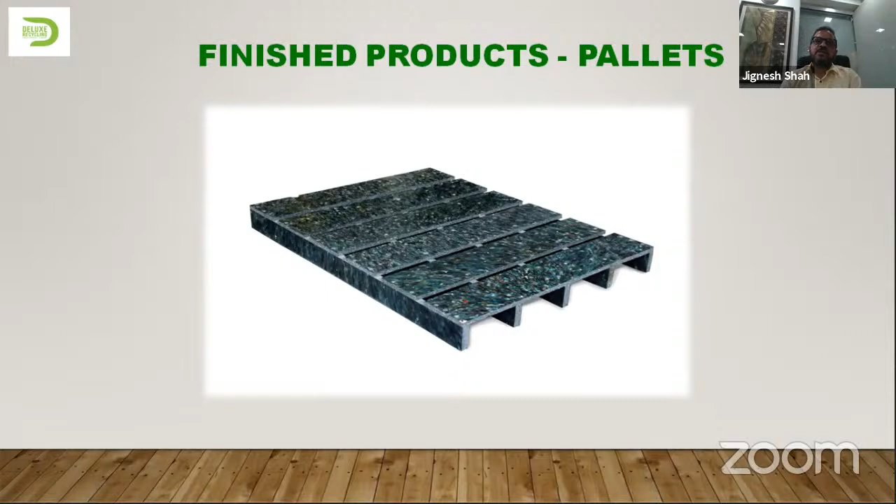We have already built close to about 4 kilometers of roads so far, both within the BPCL facilities as well as outside, specifically Noida Authority, which did a 1 kilometer road just last year. And we are looking at this as a very big application in future, where we feel that almost every road in India can be laid with these kinds of modules, and so not only do we divert our waste to a useful resource, but we also increase the life of these roads and again save very, very precious natural resources.

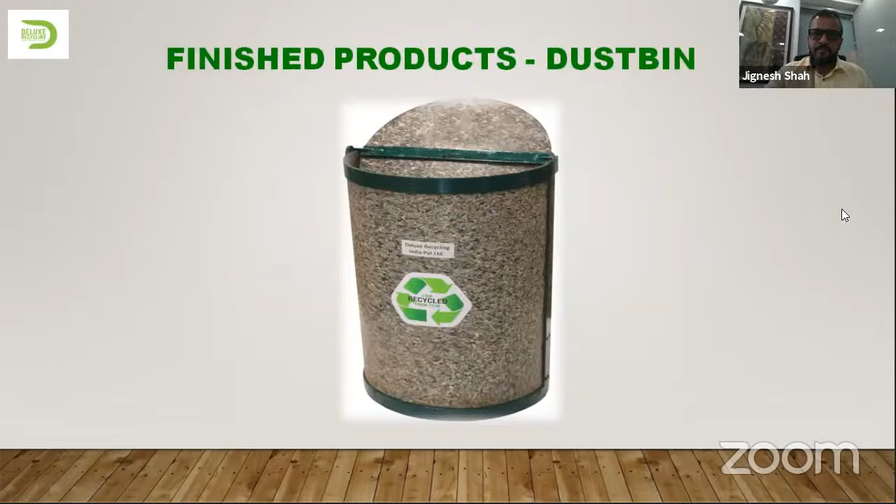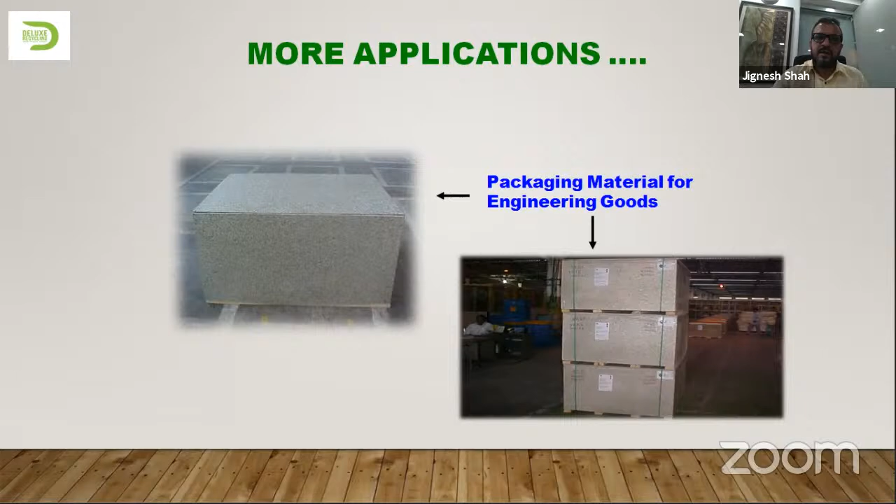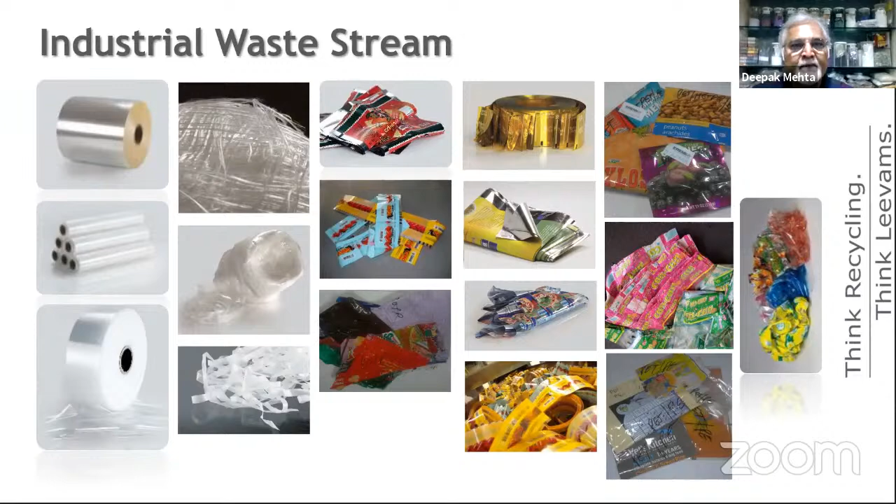The hot topic in flexible packaging waste management: MLP recycling. I will be dwelling on two aspects, the industrial waste stream as well as the post-consumer waste stream, because both are equally important. The industrial waste stream includes various monolayer, multi-layer, and plain or unprinted packaging waste, as well as heavily printed multi-layer packaging film waste, metallized as well, mainly coming from printers and converters.

What are the challenges? Let's have a glance. First and foremost, varieties of flexible packaging: monolayer, multi-layer of the same polymer family, multi-layer of different polymer families, vacuum metallized, aluminum polylaminates, paper polylaminates, paper poly-aluminum laminates, and so on. Types of packaging: plain, mildly printed, heavily printed.

Contaminations within the packaging. Apart from additives, ink and glue, you have the presence of undesired polymers, paper, wood, metals, glass, stones, sand, leftover organic waste, original fill within and on the surface, and most importantly, the typical odor or foul smell, as Pillaiji rightly said, emerging from the food waste.

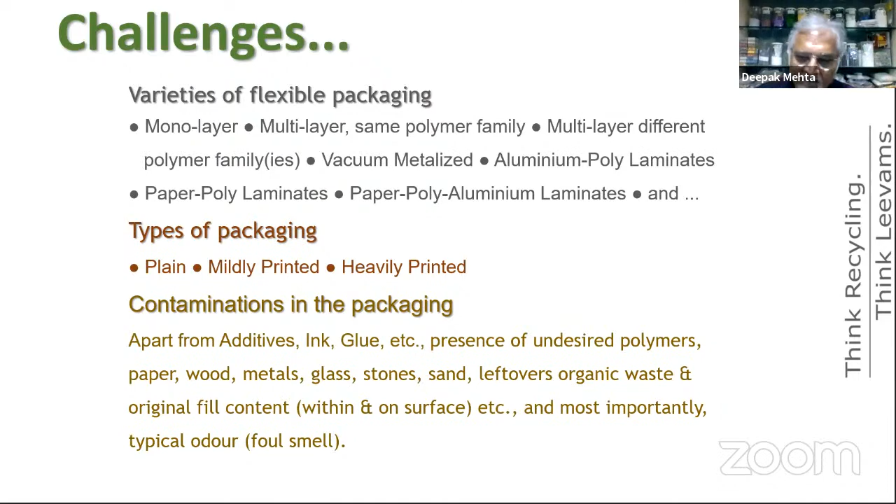And then chemical recycling is the next best option. Chemical recycling is not competing, it is rather contributing to mechanical recycling. Proof of ecological feasibility through life cycle analysis is in progress, and whether it is positive versus incineration and fossil-based virgin plastics needs to be seen. Economic success of chemical recycling will need strong policy support. And even in chemical recycling, existing technologies like sorting, washing, input stream definition, and extrusion are still going to be the key pillars.

As we see in chemical recycling, from crude oil the polymer is made through the chain, and at the end, plastic waste gets generated. So what are the options? The very first is to reuse the in-house or industrial waste back into the product, or undergo mechanical recycling and go into the loop, or solvent-based recycling through a dissolution process, chemical depolymerization or solvolysis, again back into the loop, or thermal conversion, pyrolysis or gasification, going into the loop.

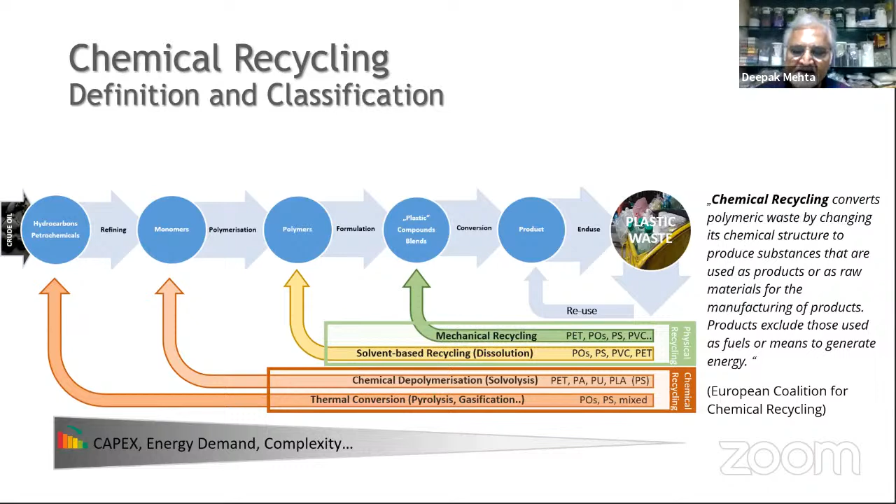Thermal conversion, pyrolysis. Pyrolysis requires a well-defined input stream, mainly polyolefins, preferred shape is thin film, as fast as possible. What are the unwanted materials in general? PVC, PET, PA. This definitely causes concern when we talk about pyrolysis.

This has been supported by a study conducted by BASF. So in a nutshell, pyrolysis is going to be a challenging area when we come to multi-layer packaging.

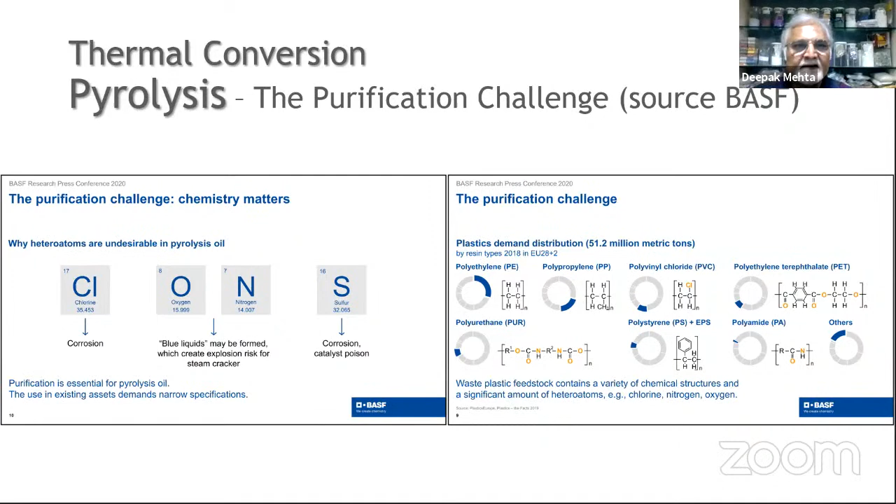What are the special highlights on mechanical recycling when it comes to MLP? Multi-layered, laminated, or metallized packaging waste has so far been either very difficult or at times even impossible to reprocess, given the complex structure. Recycled granules or pellets produced on conventional recycling plants are typically inadequately homogenized, degassed, or melted, and this makes the reuse all the more difficult or challenging.

State-of-the-art technologies are tailored solutions for production of completely homogenized, degassed, filtered recycled pellets. Features like de-inking, deodorizing, and dosing systems can add value for the end users.

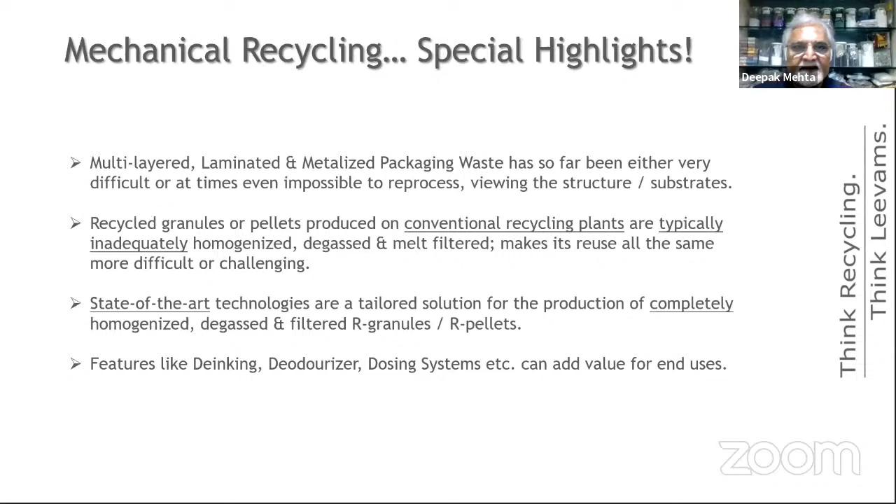Let's have a look at mechanical recycling, since this is the technology I want to talk about. Unique solution: a large cutter compactor extruder combination with melt filter before degassing. Let me repeat, melt filter before degassing, for optimum filtration and highest degassing effect.

When we talk about waste, or PCR waste, preparation of the waste is very important prior to extrusion. In a large cylindrical drum, we undertake multiple operations and prepare the right type and kind of waste before it is extruded. Then comes the extrusion process, the melt filter before degassing, and the degassing zone itself, followed by the downstream pelletizing system.

As I said, multi-layer packaging films have multiple structures, heavy prints, and leftover residues. When we talk about PCR waste, degassing plays a very, very important role.

In this technology we're talking about triple degassing: at the preconditioning unit, second, reverse extruder degassing, and third, double venting with high performance, high vacuum degassing. Unless the gases get removed, the resultant granules will not be bubble free or free from any off-specs.

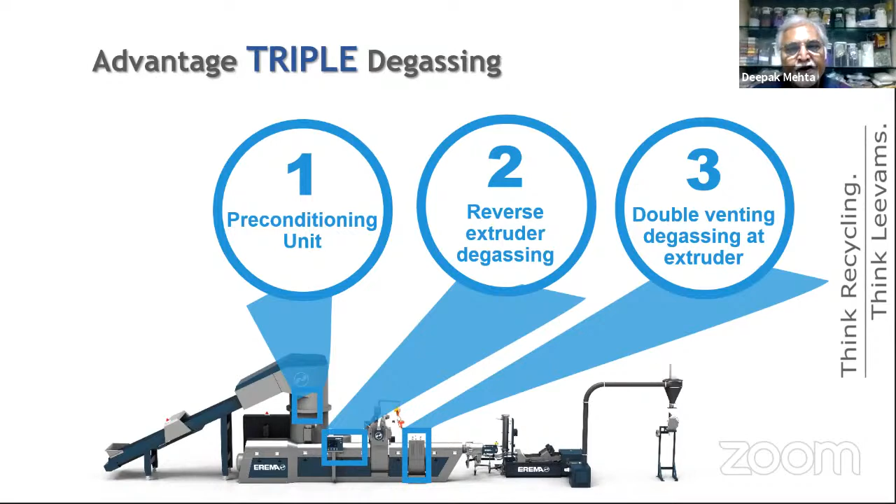Equally important is the filtration. Post-consumer waste does have a lot of leftover contamination. Despite the best washing undertaken, it still has embedded sand particles or embedded particles within the film structure itself. So effective filtration plays a very important role.

Normally for post-consumer waste, observation reveals that leftover contamination is more than 2%, 3%, going up to 5%. This is where the laser filter plays a very important role in removing the leftover contamination.

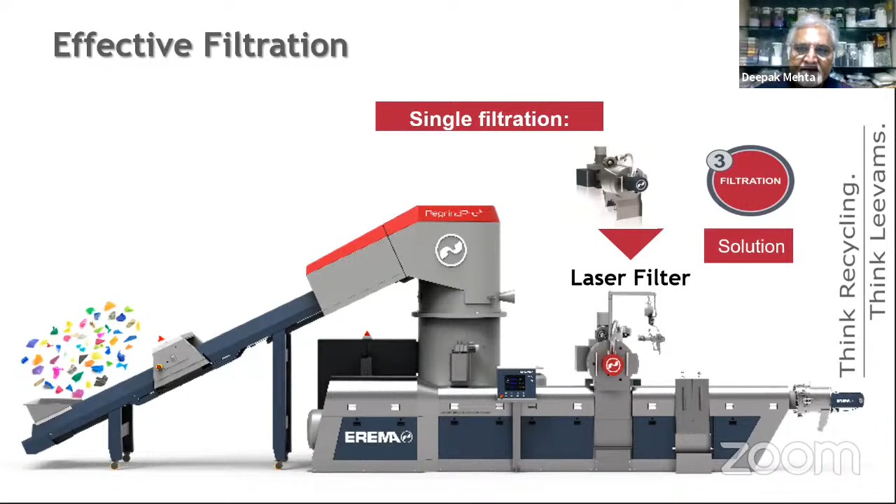In some applications for high-end uses, even double filtration is considered, where you have at the upstream a laser filter and at the downstream an automatic backflush filter: 70 microns on the laser filter and 30 microns on the backflush filter, ultimately making the end granules far more superior in terms of quality and reuse.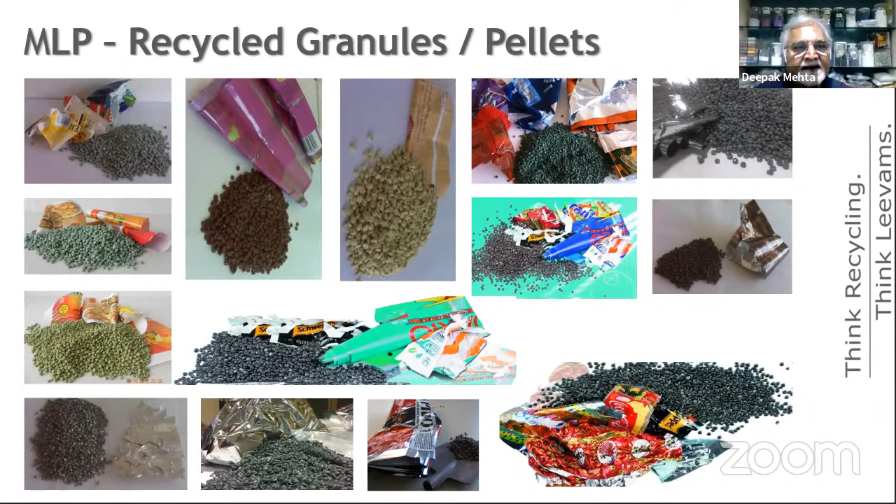Pillaiji had already briefed and showed it, but just to know, a typical application for such multi-structured recycled granules is injection molding. Several types and kinds of injection molded articles can be made.

Other potential applications are the middle layer of PE or PP pipes, or even complete agricultural pipes, roofing tiles, as Jigneshji explained, paver blocks, partition blocks, barricades, road dividers, speed breakers, tarpaulins, slip sheets, damp courses, pallets, and profiles for outdoor furniture application.

Strapping is one of the interesting applications, particularly when you have metallized OPET or metallized OPP films. And the list is endless.

Just to show you a few end-use examples of the recycled granules, you can see the pictures for yourself. What are the products made out of it?

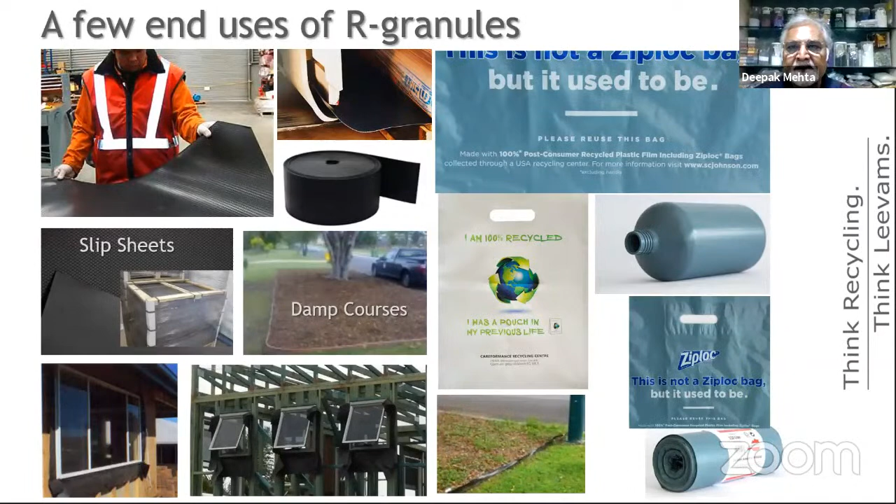When we talk about post-consumer waste, leftover odor, despite passing through the extruder, is still a concern. So if leftover odor is a concern, particularly for certain end uses or applications, here is the technology which can be considered the deodorizer or the refresher. High volatiles or odors get removed during the extrusion process, and low volatiles and odors get removed during the refreshing technology, where temperature and time are considered for removal of foul smell or odor.

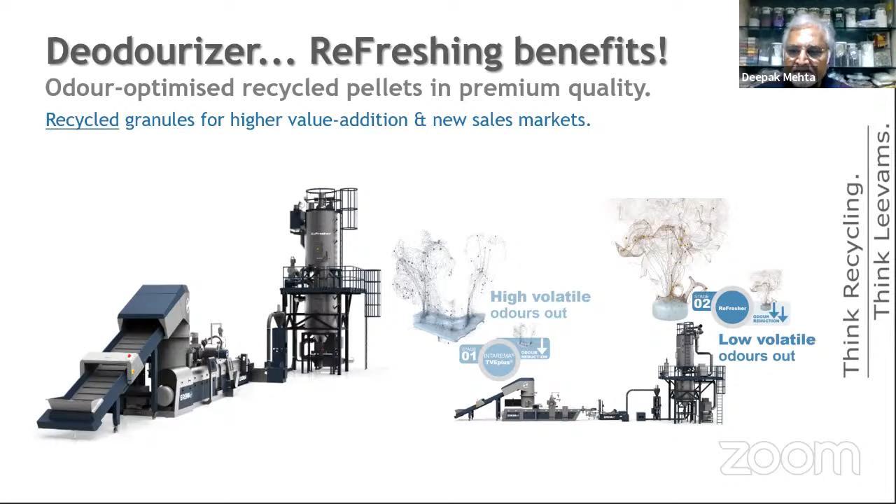Bringing value to recycled granules or pellets: post-consumer waste has a very typical mix. It is practically made of so many types and kinds of packaging films. This is where one is never certain about the end product, because input equals output and properties correspond to the source, so variation is inevitable.

Blends of polymers, their ratio, are unpredictable. Polyester content could be 5%, polyester content could be 25%, polyamide content could be even 5% or even 15%. So one is never sure what the ratio is. Despite best washing, contamination could still influence the property.

Sometimes the recycled granules are difficult to process in an injection or blow molding machine, or even an extrusion machine. So what are the tailored solutions?

As Mr. Pillai said, the simplest solution is to add polyolefin, because this is also originating from the waste. Use polyolefins in order to neutralize the effect of polyester or polyamide. You can also use compensators, modifiers, stabilizers, and additives.

In case of film application, you need to play around with the MFI, you can increase it or reduce it. For other applications, you can have optical brighteners, master batches, fillers, and so on and so forth. So flexibility is available. The only question for the end users is what is economically viable.

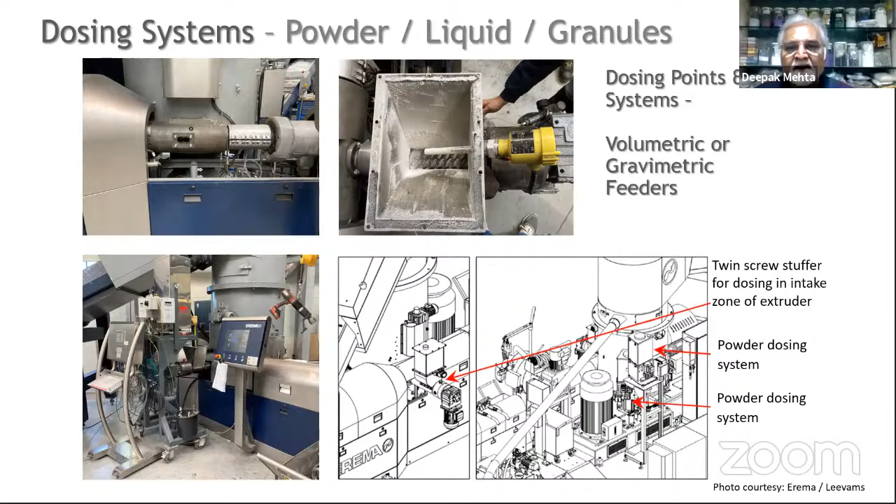The bottom pictures show you the location of the dosing systems and where they are placed. These pictures also show the actual equipment being placed on the extrusion system or recycling equipment.

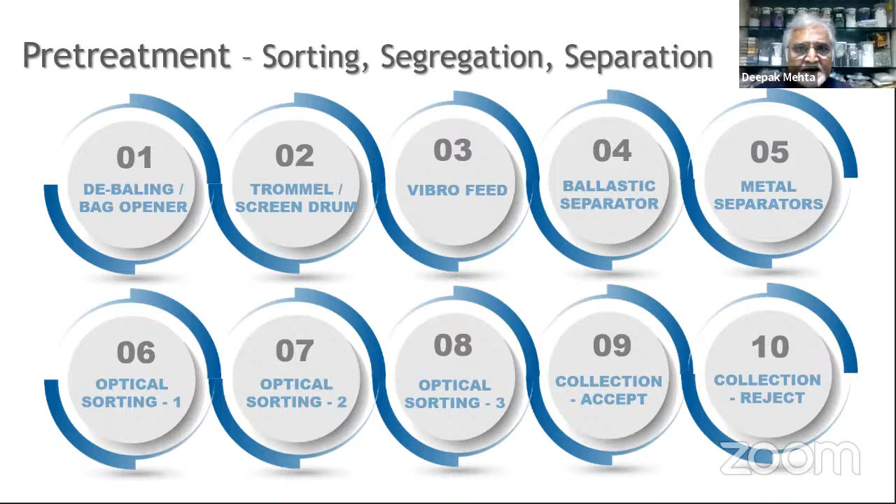Having said that, let me slightly brief about the pre-treatment of the waste, because this is very, very important. Post-consumer waste requires pre-treatment prior to extrusion or making any products for that matter. There are a series of equipments that go into sorting, segregation, and separation processes. Just to name a few, these are the listed ones.

Sorting of flexible packaging is difficult, but possible. This is where I would like to give you a little overview of what has been done, and what we have done. It's a well-established application for the Tomra company.

It is already being done worldwide for MRF, material recovery facility, and there are many plants in Europe and now also in India. We already have a working plant in India for the MRF, which covers the MLPs, and there is an increasing demand for dedicated film sorting facilities of late.

This is basically a typical sorting machine. The sorting technology is designed to remove contaminations present in the packaging: NIR for sorting by polymer grade or paper, VIS spectrometer for detection of color, Deep Laiser for non-detectables by NIR, for example black objects, stones, glass, and a metal sensor for detecting metallic objects.

And this also includes flexible packaging with aluminum packaging, so you can also remove the flexible packaging with aluminum in it.

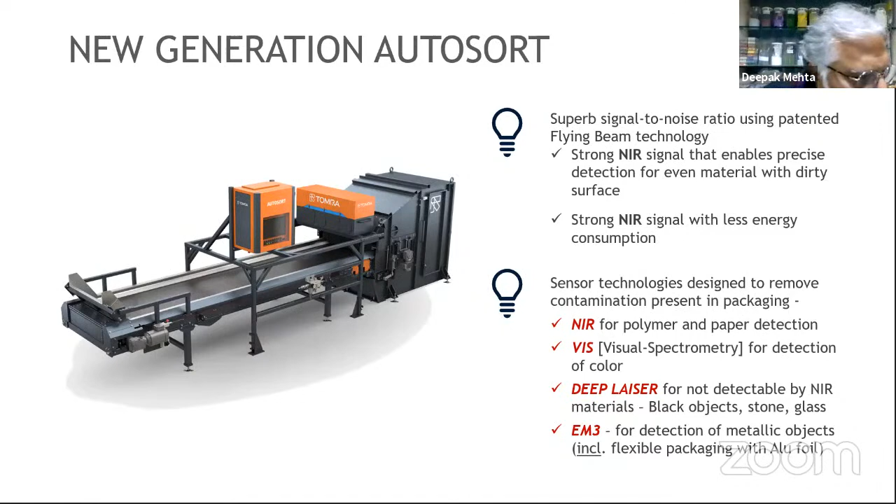Then the shredding, because an optical sort has size limitation. It can handle from 50 millimeter to 250 millimeter, maximum going up to 300 millimeter.

And then is the optical sorting machine. It could be one or it could be multiple, depending upon the type and kind of targets and the input composition. Followed by sorting is the washing and the extrusion process.

Sorting of multi-layer packaging, again just to give you a little highlight. Tomra sorters remove all the multi-layer packaging or other contaminations, and another Tomra sorter only recovers PE / PP film. As far as the entire configuration is concerned, it can be oriented based on the customer's need and desire to recover as good and recover as reject.

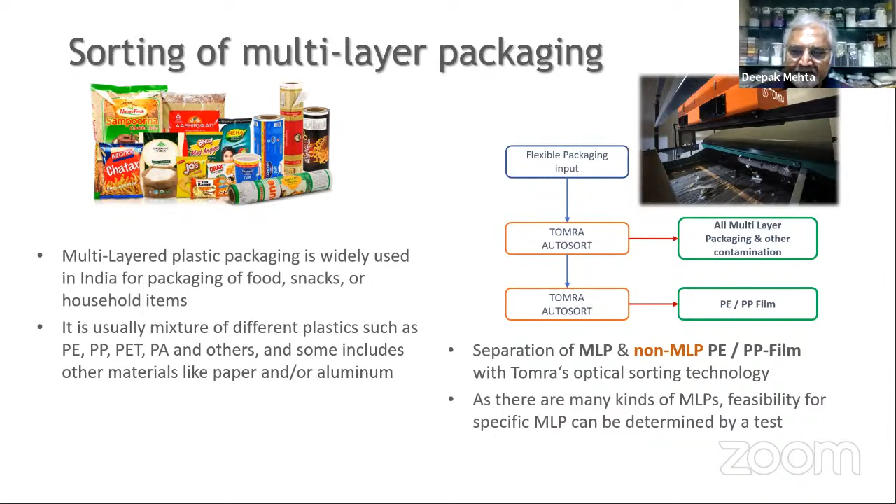This is basically auto sort speed air, because along with time we are talking about volumes. And when we talk about volumes, definitely we need a technology which can handle 1 ton per hour, 2 tons per hour, 3 tons per hour. And this is where basically it's the auto sort speed air.

For India, I would say it's a little early. We are a little behind for this technology, but at the moment we definitely have auto sort, which is good enough for the present need and demand.

How does it really operate? Basically air is the medium which is being used to keep the flexible packaging film in a very stabilized position close to the belt, which is not possible with auto sort, because when we run the flexible packaging film on auto sort at a speed beyond 1.5 meters per second, the film will tend to fly.

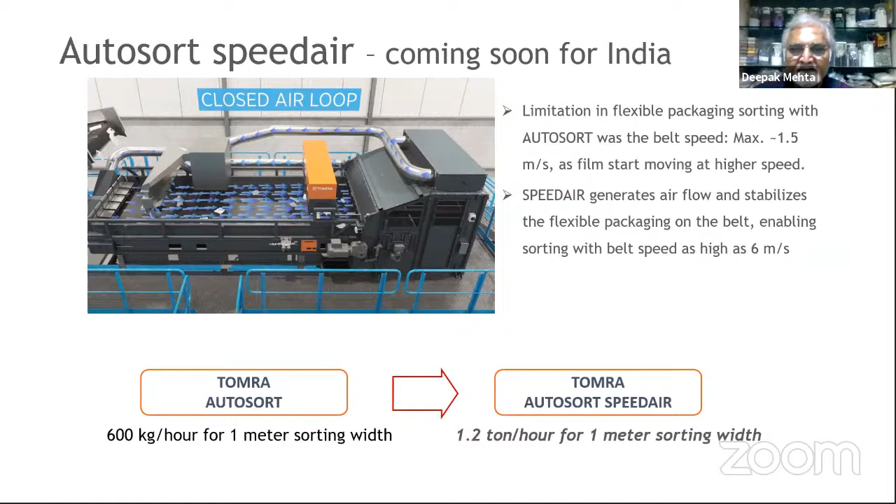After the sorting, it's washing, separation, and drying. Mr. Pillai has already covered this subject, so I would not like to go into much detail, but just to give you a broad idea, I thought I should bring along this topic in my presentation. This is an overview of a typical wash plant.

Let me once again mention what Mr. Pillai said. The entire configuration depends on the input material stream, and having known the input material stream, the entire equipment configuration gets laid out: friction washes, hot wash, caustic wash, neutralizing, and so on and so forth.

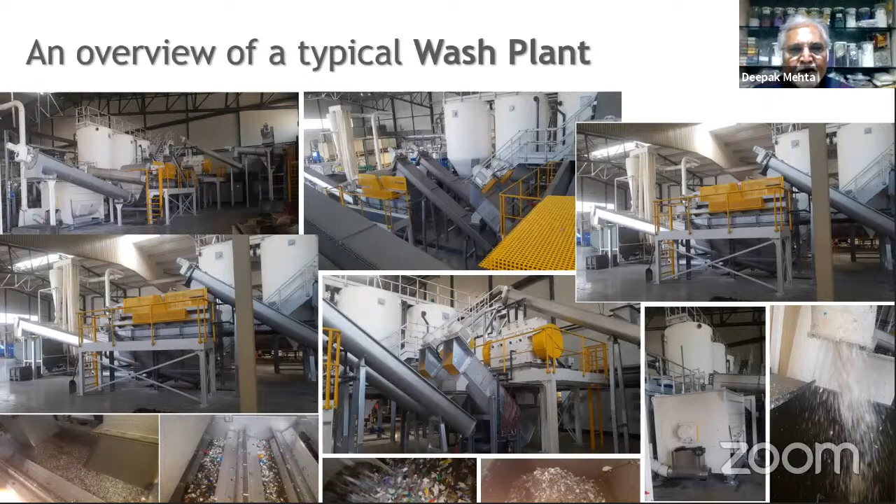This is the tech for the future, the de-inking technology. When we talk about sorted waste of only printed structure, surface printing structure, then de-inking definitely is a technology that is worth giving a thought.

How does it really work? Basically, you have the printers and the converters producing the films. They are being used by virtue of the end product. They end up as waste, which goes to the recyclers into granules, and granules get used for further manufacturing of the products, injection molded or blow molded or any other extruded articles.

But suppose you have a structure which has only the surface print and it's a monolayer, it makes a lot of sense to remove the inks and get a value addition from the granules.

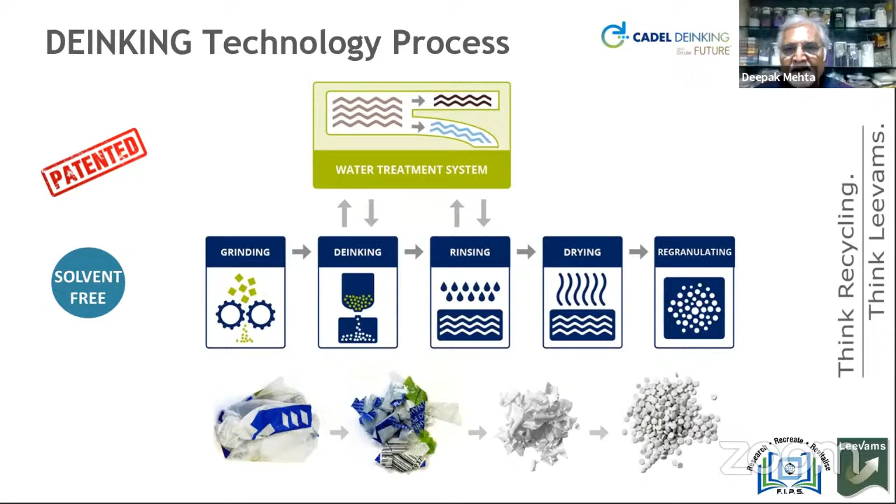Same with rigid packaging. This is how typically a plant would look like. At the moment it's only available up to 500 kilograms per hour, but higher volumes are being under consideration depending on the need and the demand.

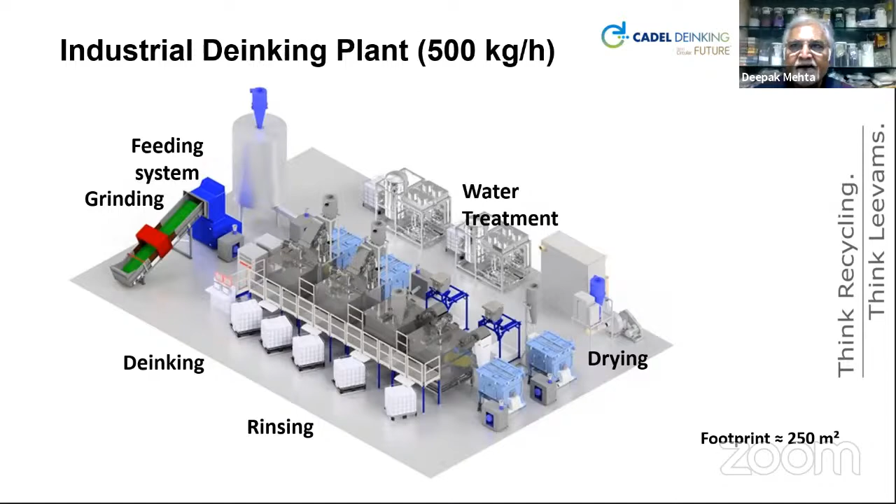Thank you, Mehtaji. I think your last word was very nice, happy recycling. And this is the way we can promote recycling more and more. Your presentation gave a very overall idea about recycling, starting from mechanical recycling, chemical recycling. And more importantly, you said that the demand will be 460 million tons coming to 2030, and today it is 360 million tons. So there are many opportunities coming in the recycling business.

And of course, you touched on the quality of the input material, the raw material, because based on that, one has to configure the washing line, and that helps to go to the recycling plant. You also touched upon the polyolefin base, because single layer material is always good for recycling, but if they are mostly polyester or nylon polyamide based, we can always go for a compatibilizer and make it a very friendly recycling manner, which is already established technology.

Overall, you have given an overall idea about the recycling of MLP, and not only MLP, including other plastic waste, how to do it: the sorting, washing, cleaning, recycling, everything has been covered. So nice presentation. It was a very integrated approach to recycling plastic waste. Thank you so much, Mehtaji.